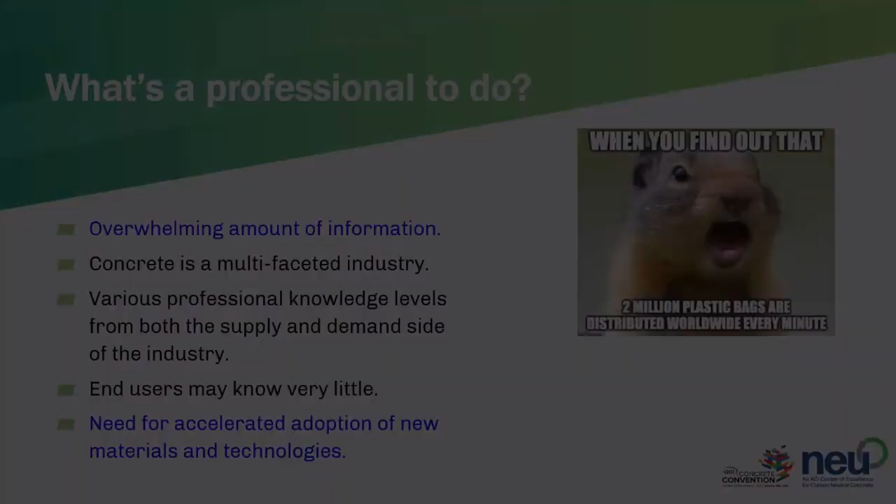So ACI saw the need and wanted to address these carbon emissions in the industry. That's why the board of directors came up with the NEU Center, an ACI Center of Excellence for Carbon Neutral Concrete, to address especially this part of the puzzle.

All right, let's quickly look at our vision: the center envisions a concrete industry where all stakeholders have access to the technologies and knowledge needed to effectively and safely produce and place carbon neutral concrete and concrete products in the built environment. If you look at each of these words, they are important—effectively and safely produce carbon neutral concrete.

So with that, the mission is to drive education, awareness, and adoption of the use of carbon neutral concrete materials and technologies. When we say adoption, we actually mean appropriate adoption of these technologies.

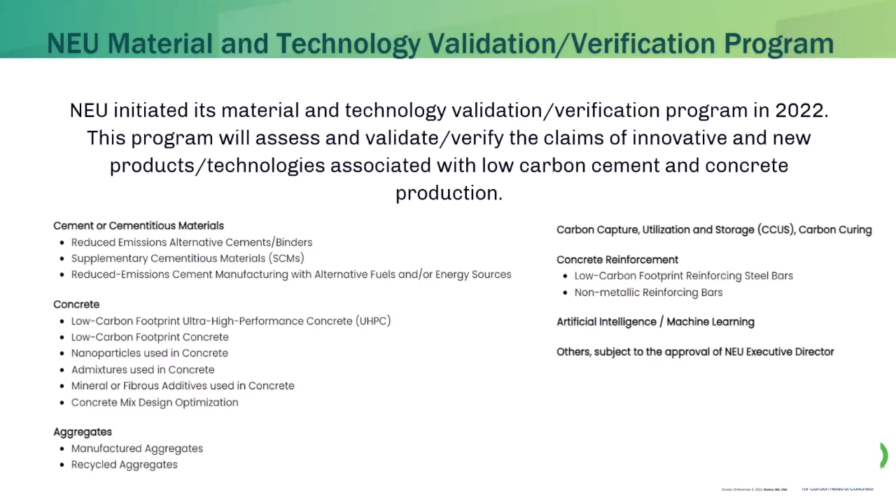Going back to my previous slide, I mentioned reliable methods. Not only should the method I use to validate or verify a claim determine if it's plausible or an insubstantial marketing claim, but also the method I use to operate my validation program must be reliable. In a sense, is it a repeatable test method, a reliable method?

Is it an international method? Can it be done in other parts of the world? To answer that question, our validation verification program will be operated under ISO 17029, published by the International Organization for Standardization, titled Conformity Assessment, General Principles and Requirements for Validation and Verification Bodies. It's published in 2019, so it's a very, very brand new document. Actually, I am also learning this document. I worked on 17065 for many years, but this is a relatively new one.

I'm not going to bore you with this figure, and I have very limited time, but I used to show this figure during my presentations when talking about conformity assessment of product certifications. If you are a testing laboratory or a certification body, you certainly know this figure. But I just want to mention that now we have a new column at the end, all the way to my right-hand side: validation verification bodies. It's new, and it's added in this figure right now.

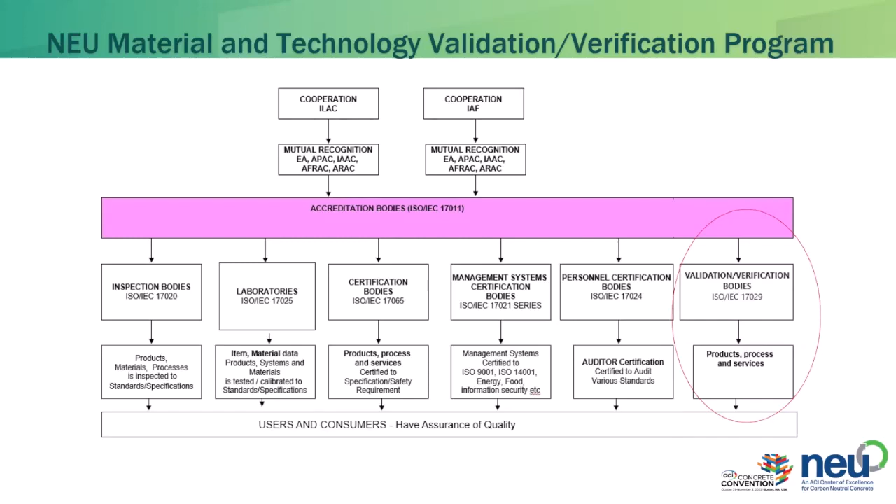So they started discussing coming up with this standard in 2016. It was published in October 2019, and they used a prior document, ISO 14065, as reference, so they are connected to each other. But ISO 14065 was only for greenhouse gas emissions. In a sense, 17029 is an umbrella document that covers all kinds of validation and verification, even including ethical statements.

So it's an umbrella document for all kinds of validation and verification statements. We'll be using ISO 17029, but if there's a greenhouse gas emission claim validation and verification, we'll be using ISO 14065 as well. Let me describe the difference between validation and verification. I got this picture from IAF, International Accreditation Forum website. I think it's a very good picture describing this. So, verification is about past activities, and validation is about future activities.

Let me give you an example, I think it will make more sense for you. Let's assume - this is not related to carbon reduction, but just for the sake of an example - let's assume I have a ready-mix concrete plant, and I invented a new water filter system which saved me 40 tons of water in the year 2022. So that's my claim: I have a new water filter system, and I saved 40 tons of water in 2022.

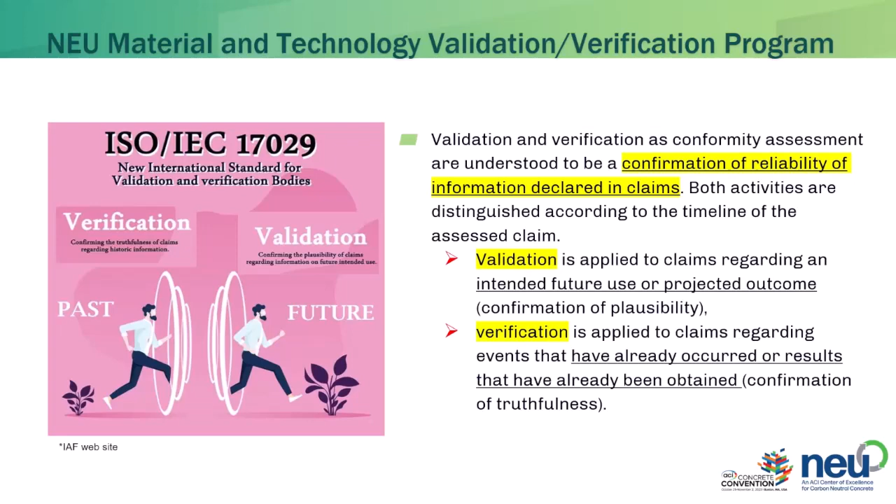And then I can validate it, but I need to ask the questions: what is this based on? How did you interpolate the data for this company? Let me get those details. But another big difference is: during verification, which happened in the past, I have all the information I need, I can provide assurance for that verification statement. But for validation, it hasn't happened - it's just an assumption. So I cannot provide an assurance in my statement if it is a validation report.

So, simplified definition: validation/verification is confirmation of a claim, and a claim is the information declared by the client through the provision of objective evidence. I put 'objective' because ISO 17029 emphasizes this word 'objective evidence' many times. You need to know where the data is coming from, who's providing the data. It has to be based on objective evidence, and the goal is to provide assurance.

Assurance in case of a verification activity, which happened in the past, or give confidence, for example, for a validation activity that will happen in the future. So I can provide those statements to interested parties, for example, a stakeholder. Remember my $5 million example? I want to invest that money. Now I have an assurance in my hand coming from NEU so that I can safely invest.

What we will not be doing is characterization of the material or system. We will not be doing examination or inspection, so we will not be coming to your factory or facility to make sure you are producing good quality material or following your quality documentation. We won't be doing certification, product certification. We won't be doing conformity assessment.

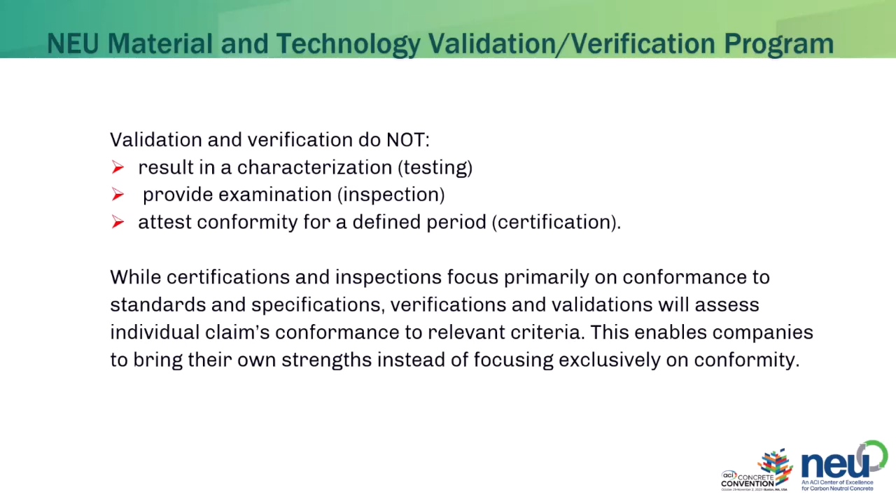So that's where verification kicks in. Your conformity assessment, your product certification through a conformity assessment may miss the best part of your product. Maybe it is being low carbon. Maybe it's having really good sound isolation. That's where you can use a validation verification program to focus exclusively on showing your own strength instead of completely focusing on conformity. And speaking of which, ISO 17029 requirements are very similar to other ISO standards.

Impartiality and confidentiality are very important. Impartiality means if I'm working with your alternative cement company, which claims to have low carbon, I cannot be working with another alternative cement company, or consulting another cement company. Confidentiality means if you trust me with your test reports, you have to know it's the final stop. It's where it stops.

We are very confidential. We have to demonstrate it through ISO 17029. Risk management is, going back to my $5 million example, if I'm going to make that investment based on a report coming from NEU, which is an ACI Center of Excellence, now I'm a part of that decision. So risk management is also very important. I need to identify all the risks that come with this activity.

You can submit your application, and then there will be a NEU team that will check your claim, and if that claim is within our scope, then we'll work with you and we'll sign a work agreement, and then we'll do an assessment.

One of the statements is, if you have a claim, and if I can use an existing standard or ASTM such as ISO to verify this claim, then we can move forward quickly. But if there's a claim with no standard, no ISO standard, for example, I was talking with somebody a couple of days ago, and they claimed carbon neutrality because they reduced the amount of labor required with the system. There may not be an ASTM or ISO to verify that claim.

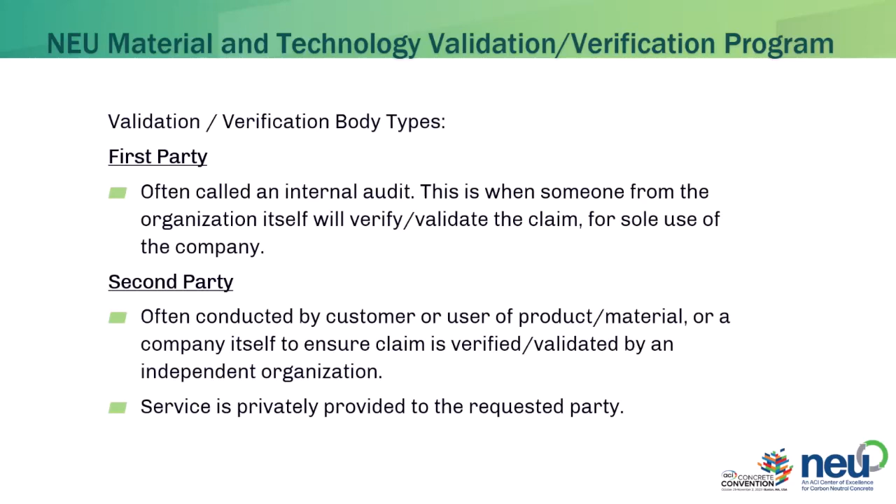Third party is similar to second party, but now NEU will make it public on our website. The report will be done for the whole public. We'll focus on second party at the moment. The report will be confidential between NEU and the client, but the client may choose to release the information at their discretion. So we'll be focusing on second party.

Again, we'll be working under internationally recognized standards. Anybody can apply. We won't be doing any laboratory work. We won't be doing physical testing or inspection at NEU. When you are submitting your objective evidence, you may be required to do some testing or submit test results.

NEU is constantly seeking subject matter experts to serve on the validation teams. You can send your information to the email below.

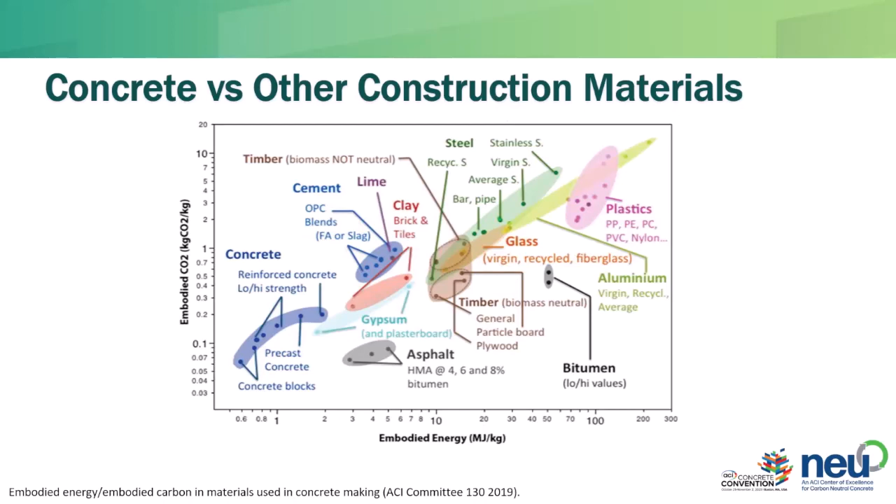So concrete, right? Compared to other building materials and construction materials, if you look at embodied carbon on the y-axis here and embodied energy on the x-axis, so how much it took to make it, concrete and cement are pretty low relative to some of these other materials. I think a lot of people are often confused by that. You see that and you say, oh, maybe it's not so bad. And of course, we all are here for concrete, right? So pro concrete, but it's kind of interesting to look at that.

So one of the questions you have to ask yourself if you're trying to look at Portland cement and reduce that carbon footprint is, where does the carbon footprint come from? Specifically in the production of Portland cement, I think probably most of us know what this kind of situation is.

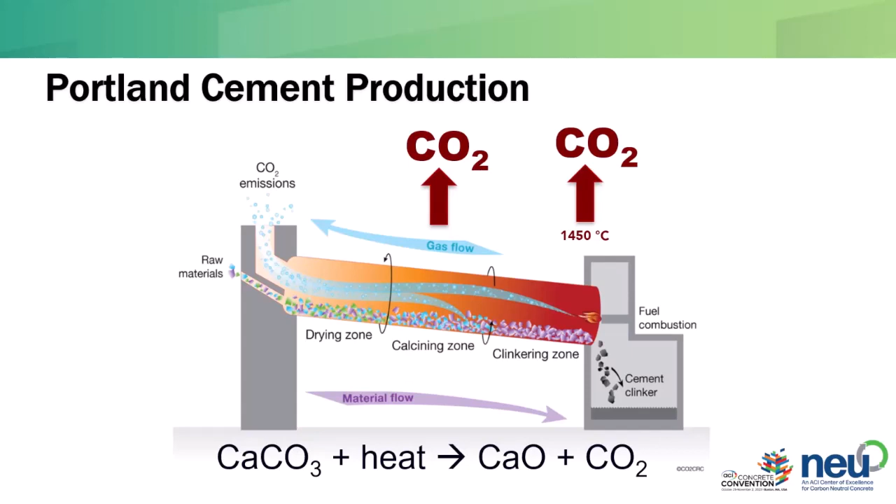Sharika mentioned earlier, there's all sorts of people on the case. We have ACI, PCA, all the letters, working on this, which is good. And if you go online, which I have been, I'm working on this document, I'll talk about it in a few minutes, there's all sorts of roadmaps. Very cool, and a lot of them are generally heading in the same direction.

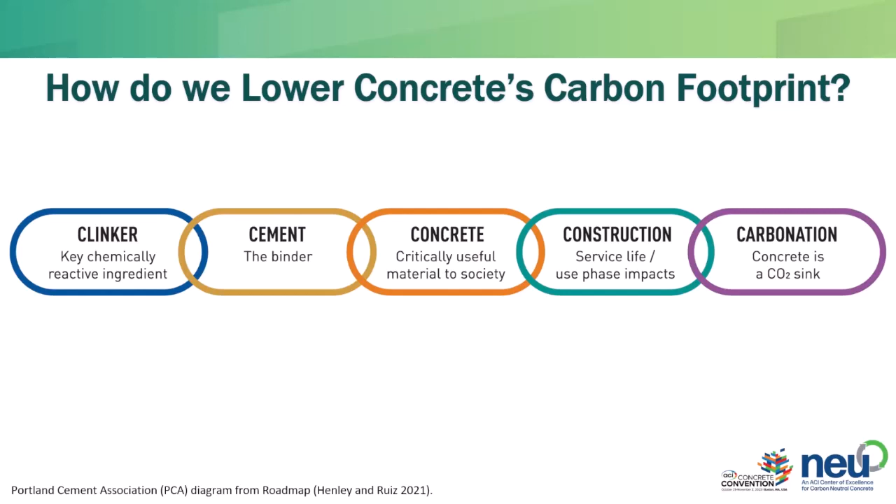So it's interesting to see what everyone is looking at moving forward. This is from the California-Nevada Cement Association. I really like how they organized it. This came out just this year. They're looking at emissions in three different categories. The first, process emissions—that's like the limestone calcination.

What can we do? Blended cements, CCUS, alternative cements, and clinkers. Then they break it apart into combustion emissions—at the plant, what can we do? We can burn different fuels to reduce that carbon footprint, and further look at waste heat recovery and renewable electricity to reduce that. So I kind of like how they organize that.

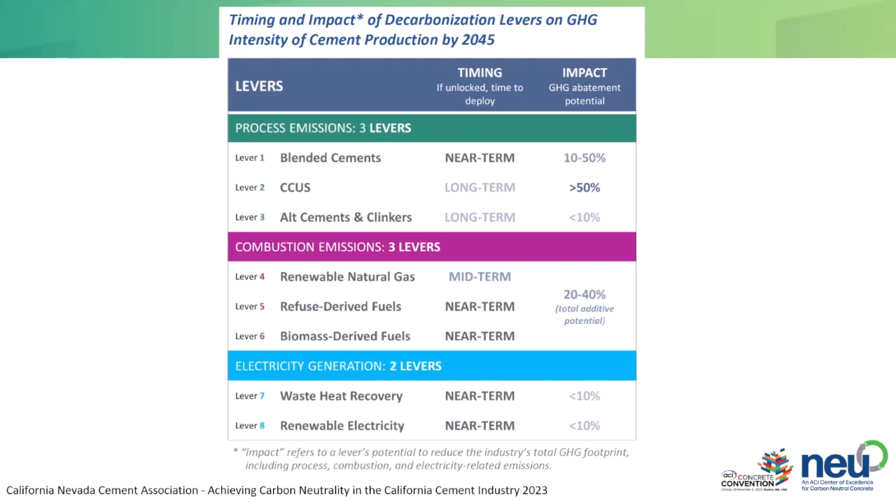All right, so anybody here that's been working on the sustainability and resiliency of concrete, it kind of always starts with sustainability and resiliency. I teach a class on sustainability, and we spend a whole hour talking about what is that, what is sustainability, what is resiliency. They're really big concepts, right? Well, we're narrowing it down.

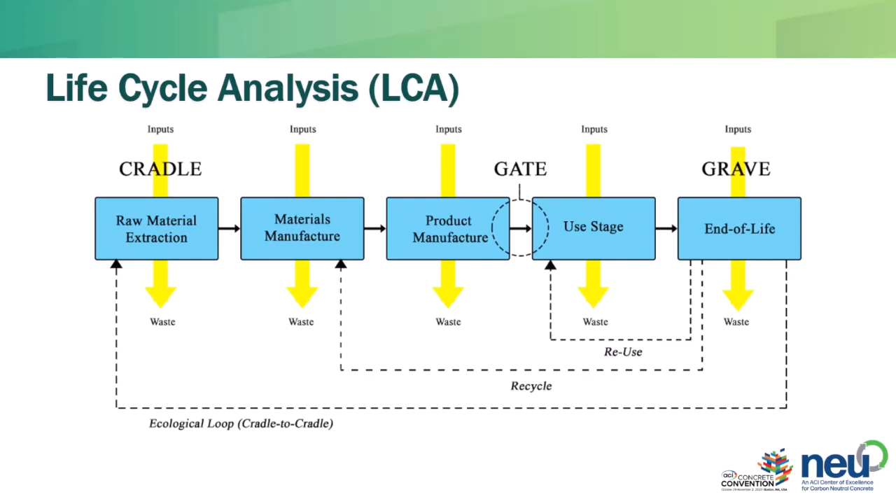And like Sharika said, we have to measure things. We have to get numbers. So we're relying on LCAs now, and we're relying on EPDs to give us numbers so we can make decisions based on data. And that's a really big deal.

All of this is leading to the low carbon concrete code. I almost started asking questions to you like I was in class—sorry, that would be weird, calling on people. Anyway, coming to this code.

So there's a lot happening right now. It's very exciting. I'm going to talk a little bit about the materials that are out there right now, what's maybe coming down the pike, and what are some of the questions we need to be asking as we start to embrace these new materials.

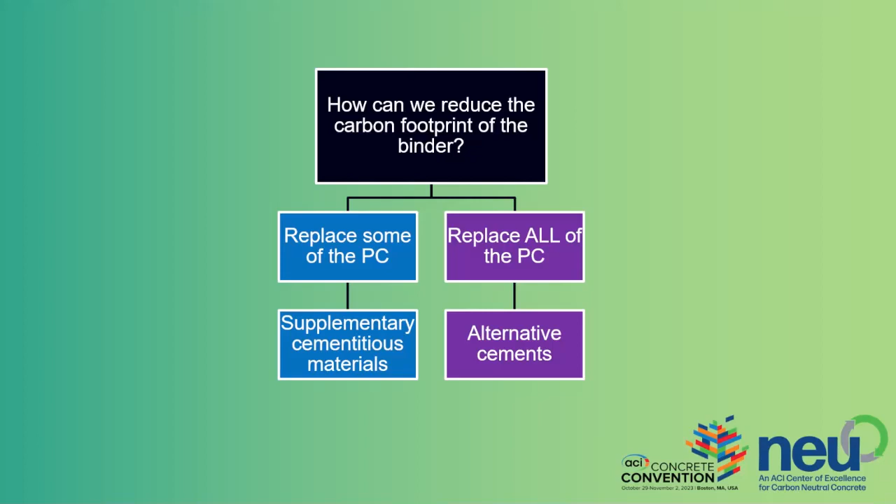So this is sort of how it used to look—how can we reduce the carbon footprint of concrete, replace some of the PC, replace all of the PC. Now we're saying, okay, we can also recapture some of the CO2 through CCUS. We're expanding it even more.

How about we make ASTM C150 Portland cement, but in a different way, right? This little chart could just keep going on and on. There's all sorts of new stuff coming out. It's pretty cool.

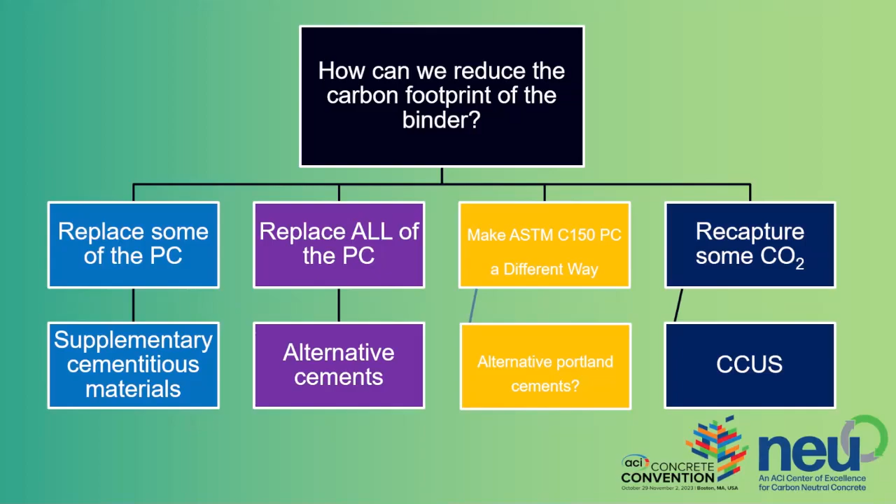So, SCMs—probably you're like, oh great, SCMs again. Everybody knows, but the thing is, they're here now. We know how to use them. They work pretty good. It's pretty direct: let's get rid of a certain amount of PC, put in something else. Lots of different SCMs. ASCMs are alternative SCMs—there's the classic traditional ones out there, and then a lot of others being developed. There's a lot of test methods being developed so we can use additional SCMs moving forward. That's a big deal.

As most of you—I have no idea what this audience is, probably some of you know—when you're looking at SCMs, they're not all the same. They're different. You have to know what they're made of chemically, what the particle size is, where it's available geographically, and they behave differently.

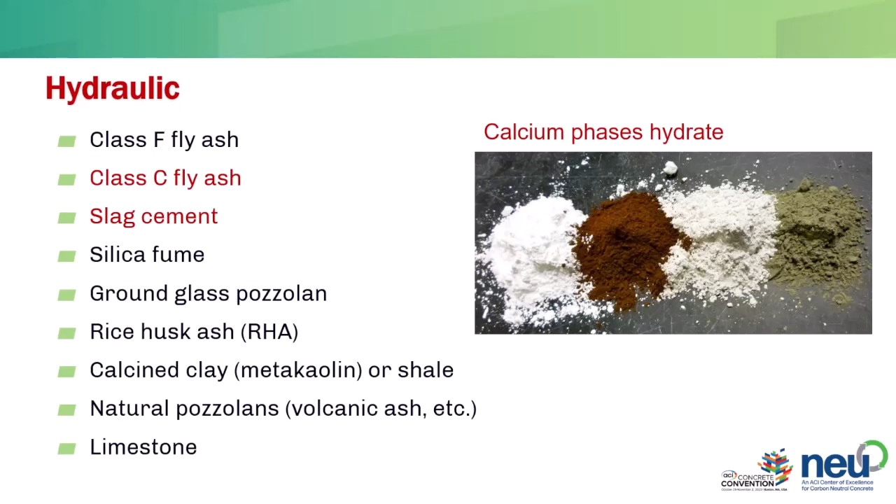So SCMs that are higher in calcium tend to be hydraulic. Class C ash and slag cement are good examples of those—if you add water to it, it gets hard on its own. You're going to have a little bit higher replacement level with those. Also pozzolanic—many of these materials are pozzolanic, rich in silica or alumina, reacting with calcium hydroxide from hydration to form more CSH.

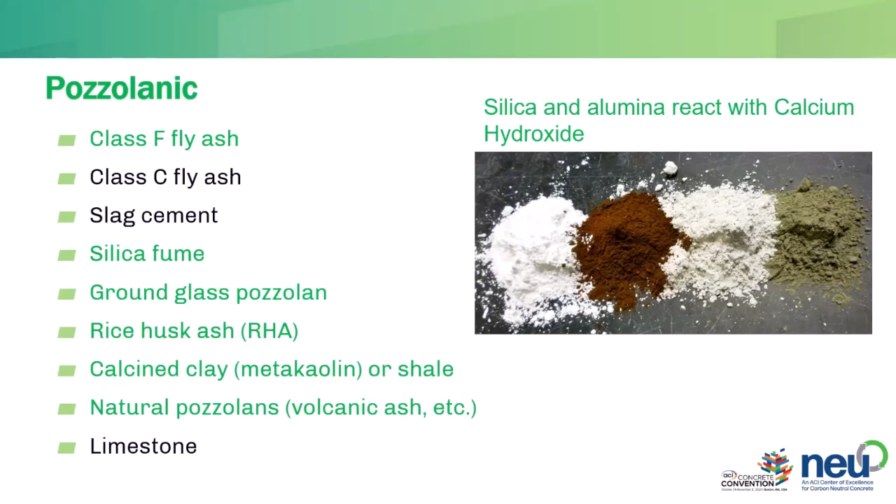And then, I don't want to argue with anyone—is this a filler? I don't know. This is what I put on my slide, but limestone is out there too, as a big one.

We hear a lot about limestone, but it used to be sort of a filler grinding aid. Right now we're saying, man, it does some things to the concrete. What is it doing? How does it work? Maybe it's nucleation sites, but it's a material that's going out there replacing some of the Portland cement.

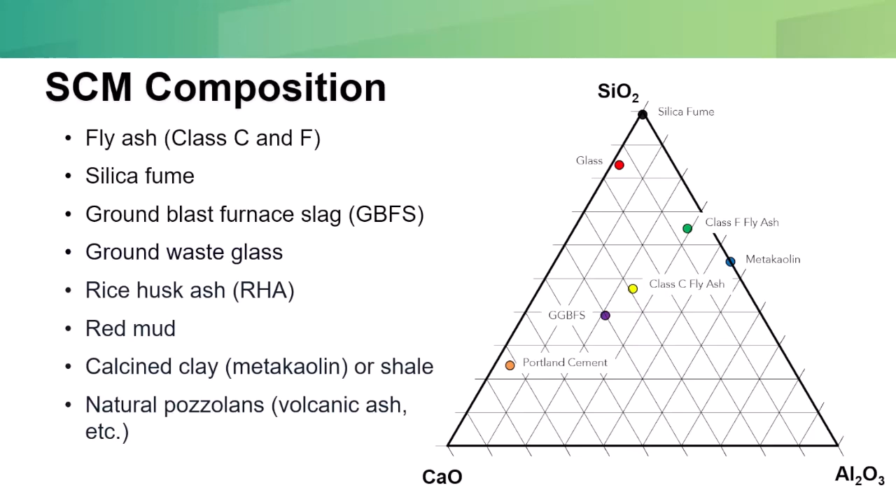When we're looking at these SCMs, the classic ones that have been around, we're looking at composition. That's really big. Calcium, alumina, silica, where does it land relative to others? Then we can kind of get an idea of how it's going to be.

So fly ash, ash that goes up into the air from coal-fired power plants, is of course the big one, most people's favorite I would say, and it's really great. This fly ash is a good example of kind of how complicated it is when you look at these alternative materials or newer low-carbon materials.

So fly ash, at first glance, you say okay, I'll replace 20% Portland cement with fly ash, great. But fly ash particles are super spherical, they have this ball-bearing effect, allowing you to maybe make your mix with a little bit less water. So now you have a more dense mix, a more impermeable mix, a more durable mix.

How do you quantify that? Maybe that mix is going to last longer than the other mix, need less maintenance. So there's more to it, I think, than just looking at direct replacement. And that's something to think about.

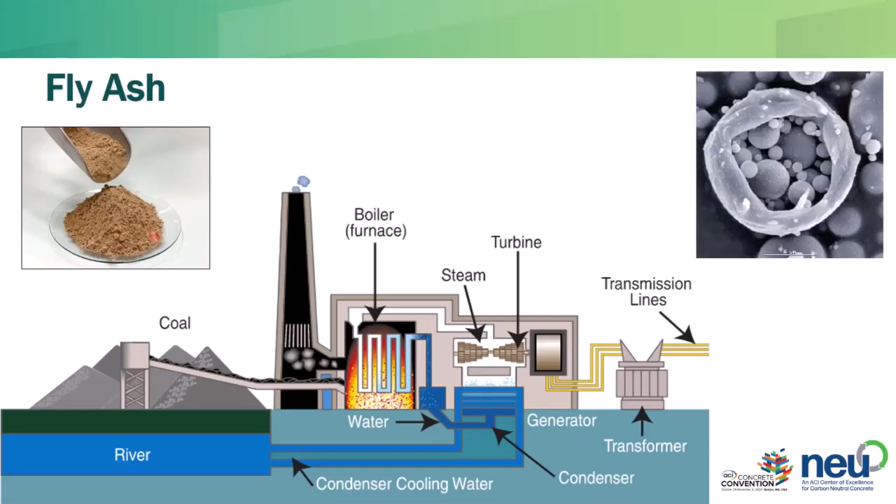I think we're all aware that fly ash availability is changing. Coal-fired power plants are being shut down, and that's good for the environment, maybe not so good for the concrete industry, but it's pushing us to look at other materials.

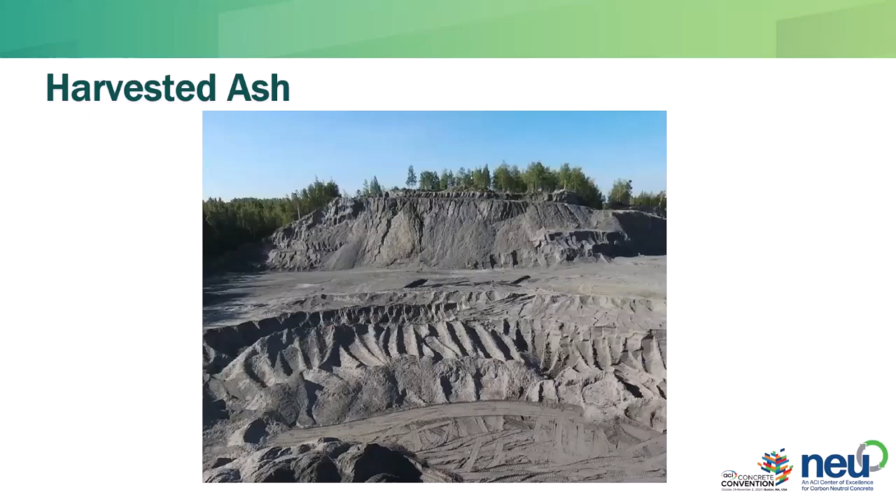There are a lot of other materials out there, also lots of harvested ash. I think we've been using fly ash in concrete since the 70s. Before that, they'd throw it away. Since the 70s they started to use it, but they were still kind of, I'll take the good stuff and throw the bad stuff away - high carbon, high alkali, whatever. And now they're like, where did we put that? Go get it. So there's a lot of harvested ash out there, and really great work being done processing it and making it successful. That's a pretty big one.

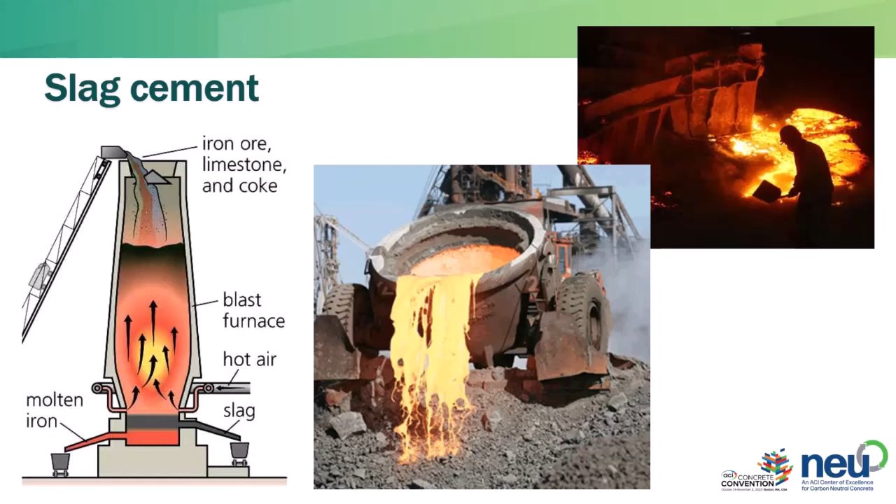Slag cement, of course, is out there. Works great, not available everywhere - it's sort of available where you're doing steel or iron work, sorry, should know iron from the Iron Range. But it's not available everywhere, so sort of where you are matters. If you're wanting to use slag but you're not near slag, transporting it is going to really cut into any kind of reduction benefit.

Silica fume is another big one, kind of similar to fly ash I'd say. Made from the ferrosilicon industry, tiny, tiny little particles, spherical - I think I've read twice as fine as cigarette smoke. Does amazing things in concrete - tiny little particles relative to massive cement particles, you get this really great packing, really dense, nice bond between aggregates and paste, etc. So you get really, really good concrete from using silica fume.

Ground glass pozzolan is sort of one of the newer classic SCMs. ASTM came out with a standard in 2020, and a lot of work has been done on glass pozzolan. One of the things about ground glass is it's available - we're all drinking beverages, eating pickles, everywhere we are, so there's glass all over the place. It's not being produced everywhere as ground glass pozzolan, but there's the potential for that to be more regional.

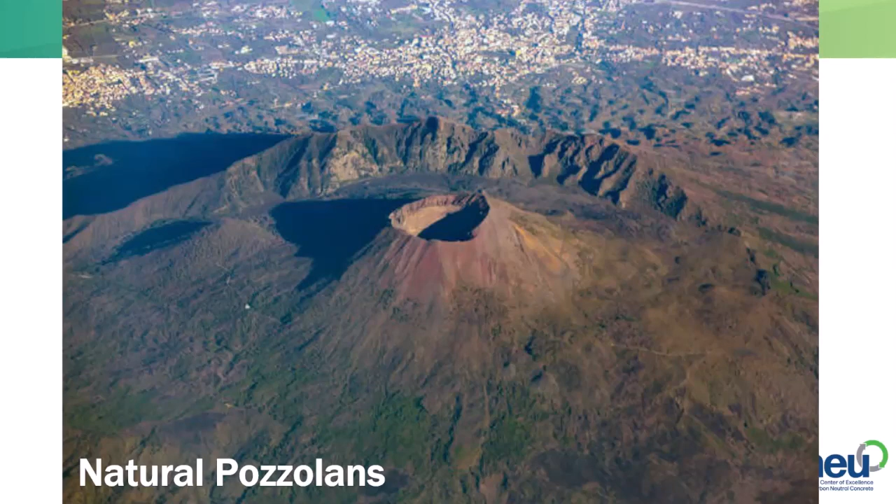Natural pozzolan - obviously not so much in the United States, but around the world folks are using all sorts of natural pozzolans: volcanic ash, pumice, scoria, mostly in the West here in the United States - materials that can be taken from the earth, maybe heated a little bit, and used as the SCMs.

And then we have some, I would say, ASCMs - alternative SCMs - so red mud from aluminum ore mining, some rice husk ash, right, all sorts of other materials that are out there that are being considered. A lot of this has to do with where you are and what's available.

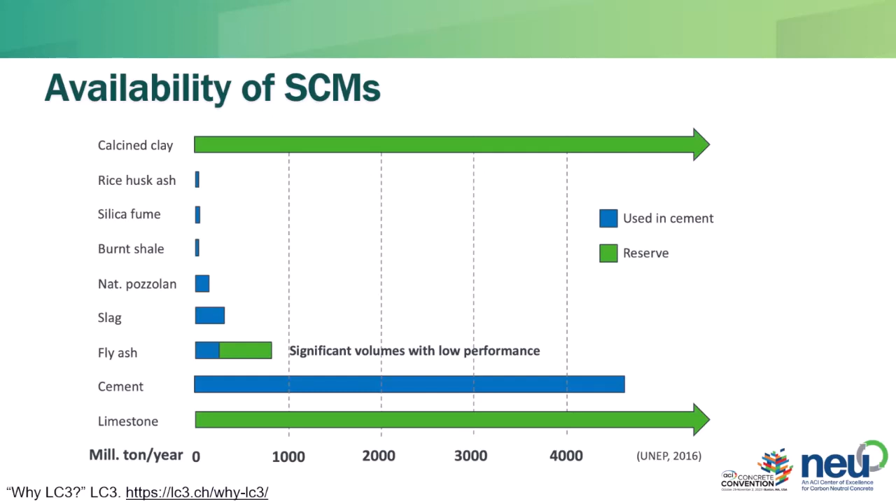So you look at these materials and say, okay, they're great, but there's not a lot of them out there. So a lot of folks, Karen included, are saying, what about calcined clay? What about limestone? These are the materials that are abundant around the whole world. So she's been working on developing LC3 cements, based on some clinker, or Portland cement essentially. You can't see my mouse, right?

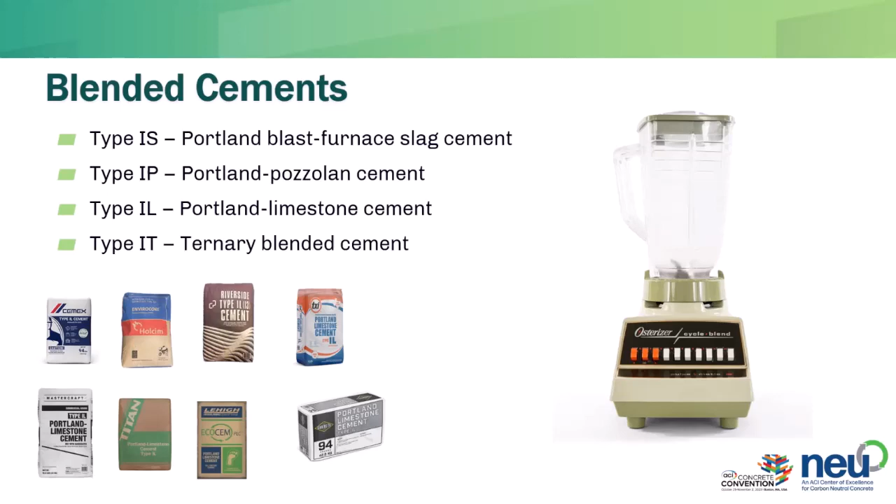Blended cements, of course, all different types—blending Portland with slag, pozzolan, limestone, or ternary blends, which are sort of DIY, your own mix. I think we all know Type IL is really here. Here are all sorts of things, right. But that reduces some of the Portland cement right off the bat. And it's been around for longer in Europe than here, so every time something new comes on board, there's always growing pains, always a learning curve.

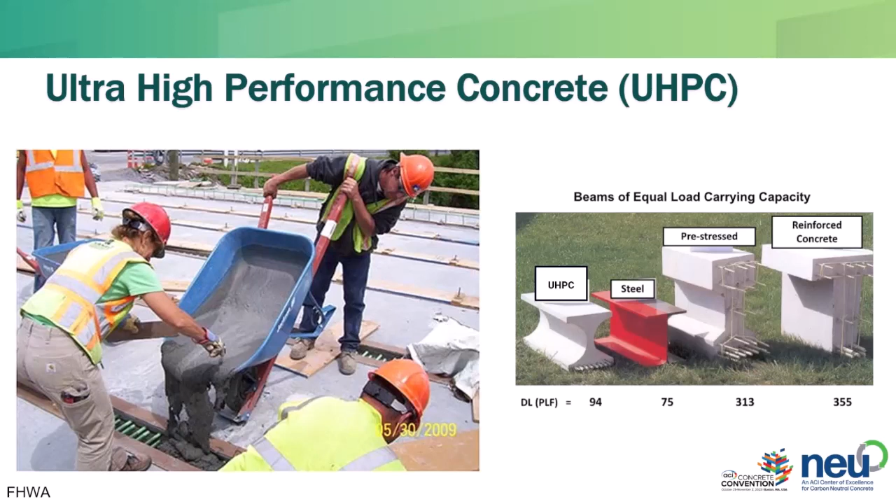So when we start looking at all these materials, there's a lot to consider. Alternative cements, like I said, we replace some of the cement, or we replace all of the cement. This is from 242, the Committee on Alternative Cements, essentially saying that an alternative cement is a complete replacement of Portland cement, except if you need a little bit of Portland cement—so it's a full replacement.

We classified them as clinkered alternative, calcined, and non-clinkered. In the ITG that was before 242, we looked at trying to classify all of these different alternative cements. There's a very wide variety of chemistries out there, which is awesome but also complicated. You can't just say, do this for Portland and do this for alternative cements—they're all different, they all need to be handled differently.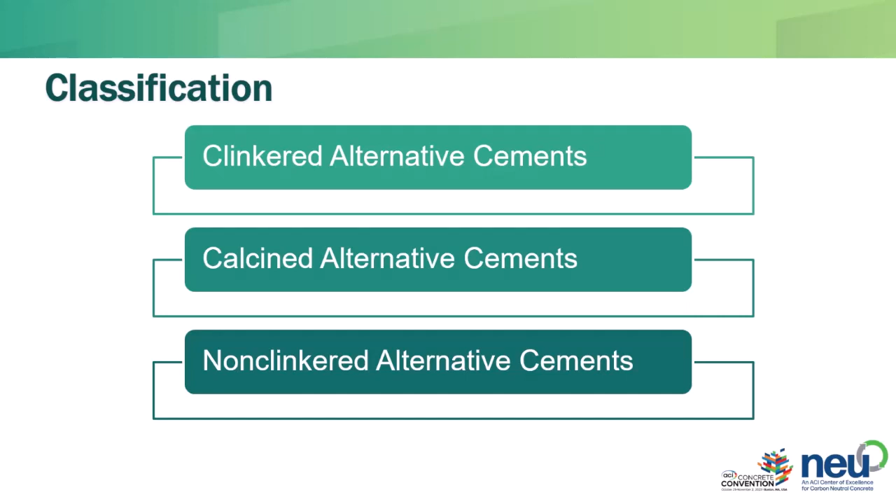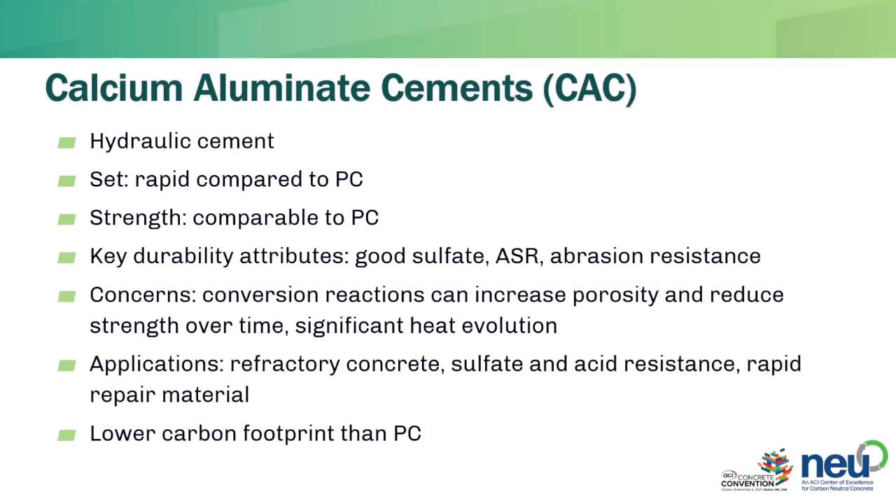Calcium aluminate cements, I won't go through this whole thing, but are hydraulic cements typically have a lower carbon footprint than Portland cement. Applications include refractory concrete, rapid repair material. So that's the other thing to consider: there's a lot of alternative cements out there, but it doesn't mean they're all direct replacements for Portland cement. Portland cement can be used in a number of applications, as you know—calcium aluminate cements, maybe not a direct replacement.

Just an example, though: there was rapid repair of an airport runway in a cold climate in Norway. They had about 15 minutes for set time and got 5,800 psi after 6 hours. So some of these cements, while they don't replace Portland directly, have really amazing properties.

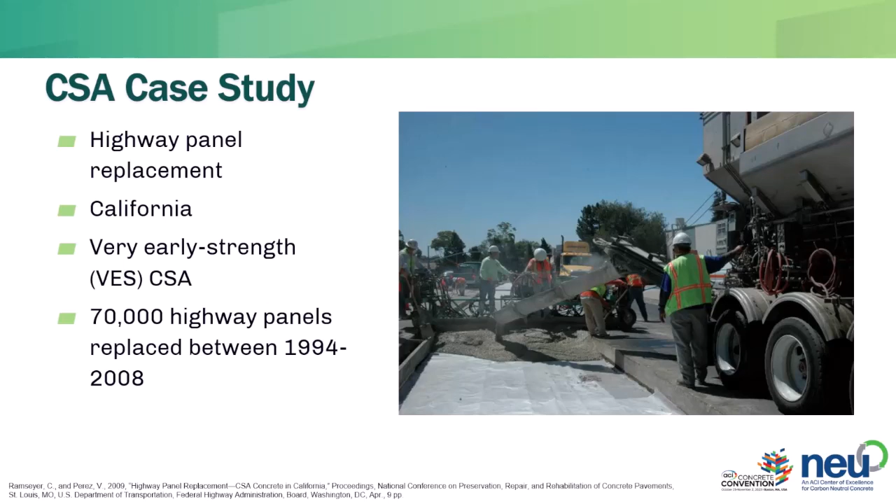I'm going to go through these—sorry. CSA, calcium sulfoaluminate cement, a big one. There's a bunch of magnesium-based cements. Alkali-activated cement's the one that we hear about frequently. This is probably the closest one that can replace Portland cement or be used in many of the same applications.

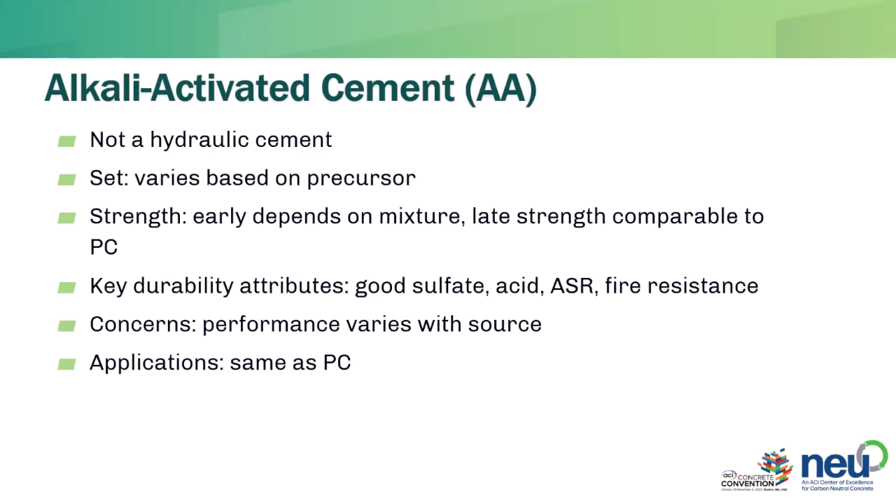Just FYI, in case you're interested in these materials, ITG 10 came out with a report on alternative cements. There's also a practitioner's guide. The report has more academic information. The practitioner's guide has case studies much more clearly presented, covering these different materials. It offers a review from the report, and then a section on what you need to consider if you're looking at an alternative cement, because there's a lot of questions that need to be asked. In addition, we just came out with an alkali-activated cements report, if you want more information on that specifically.

So, carbon capture, utilization, and storage - we saw that was a key player in many of the roadmaps that we've seen. This is just from Wikipedia here. I've talked to Sarika and several other people about trying to make sure we're all on the same page in terms of what's what. But essentially, there's a lot of companies out there right now looking at trying to pull CO2 either from a specific industry, such as the cement industry, directly from there, either storing it or using it somewhere, or capturing CO2 from the atmosphere. And the utilization goes a long way - carbon curing for mineralization, that could be with cements based on wollastonite or other calcium silicates. SCMs, some of the SCMs are ground with CO2, and some of the aggregates, the same thing. And so that is a very, very hot topic right now.

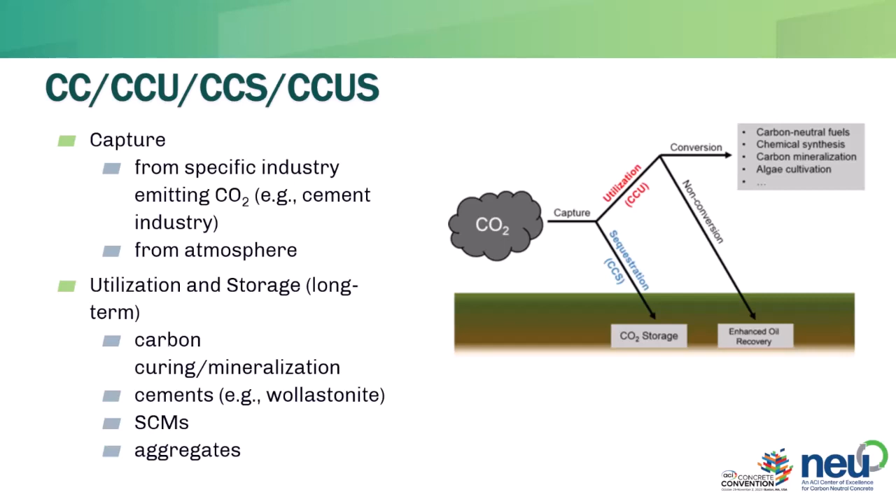I don't know if any of you guys got to the session, I think on Monday, but there's a lot of work being done out there on that.

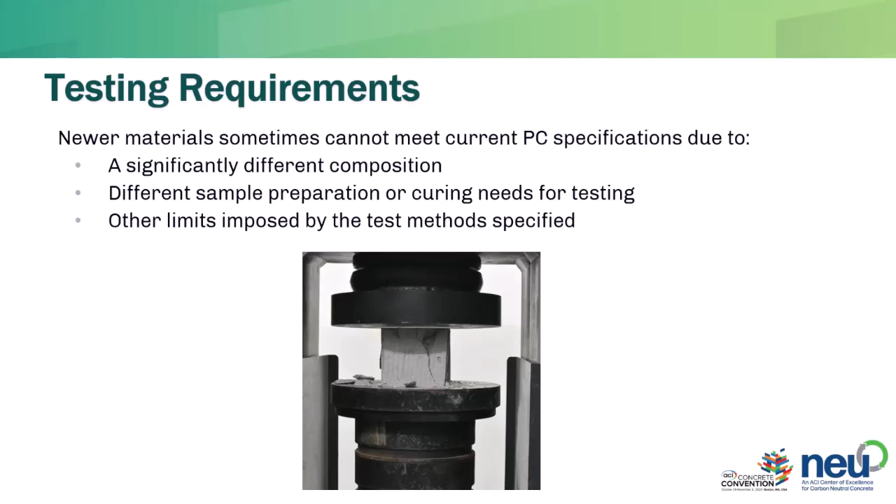So some of the challenges as we look at these new materials, of course, testing requirements. ASTMs written for Portland cement do not always apply to some of these newer materials. The example is alkali activated cements might need a little bit of heat cure, okay? ASTM's C109 doesn't allow for that. Otherwise it works. And I think ASTM just fixed that, but there's lots of questions out there.

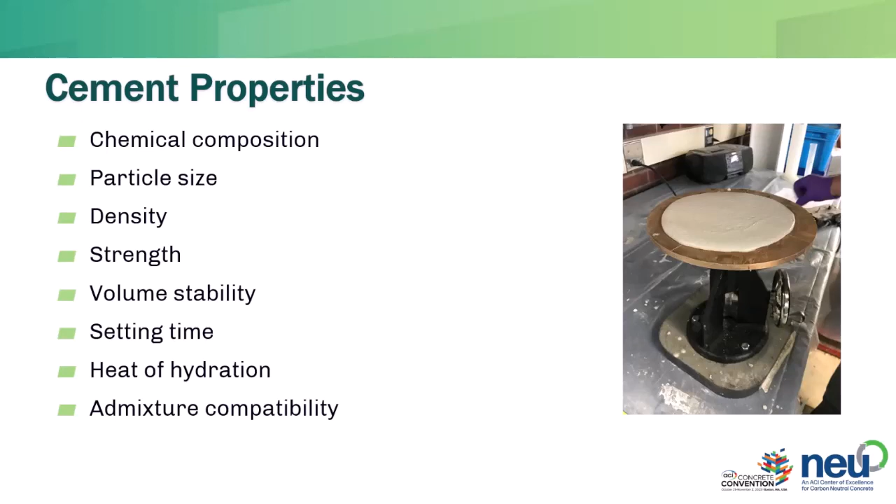And so it's lots of things to consider. Long-term testing data is one of the things that a lot of people are looking for. I think when you're looking at any kind of construction having to do with life safety, of course you're saying, where's the data, where's the proof that this is lasting a long time? All sorts of cement properties need to be understood with these new materials - there's a list here - concrete properties as well. Lots of questions to ask. But I think that the companies that are out there are learning a lot from things like ACI and starting to answer all these questions.

So one of the things I've been working on, I've been doing a little bit of consulting with the NEU, and one of the things I've been working on is a low carbon concrete materials company survey. So trying to reach out to all the companies out there. And if you're a company and I haven't reached out to you, please reach out to me - be happy to have you be part of it. But we're trying to say, what's going on out there? What are the companies doing? And so these are some of the questions that we're sort of asking.

So what's the technical readiness level? Are you starting up? Are you in lab doing stuff? Are you actually producing? When are you going to be available? Where are you available? What are you making - an alternative cement, a reinforcement, what other materials? What's your potential application? What's your global warming potential? Have you done an EPD? And then what's the cost, roughly?

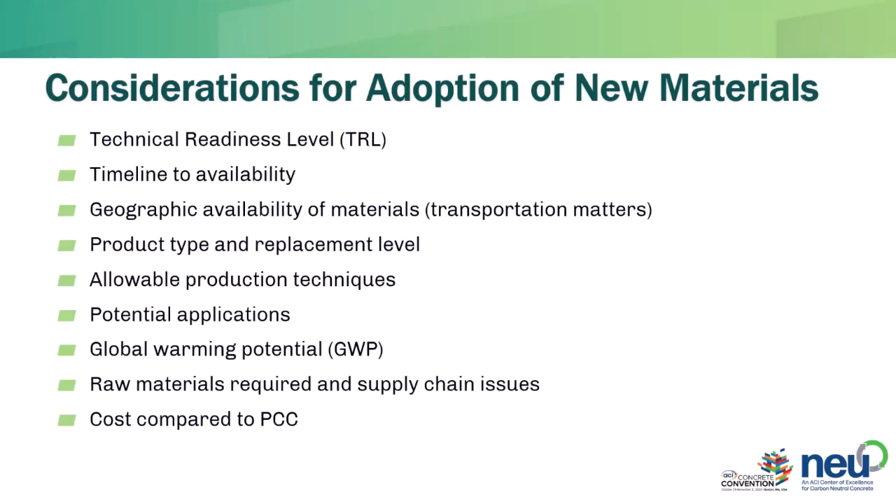And it's been really interesting to see what's coming back, and there's a lot of really awesome technology out there. So we're working on that survey. There's two parts - Part A is pretty quick, and then Part B is a little bit more in depth, just to kind of get a better idea of what you're up to.

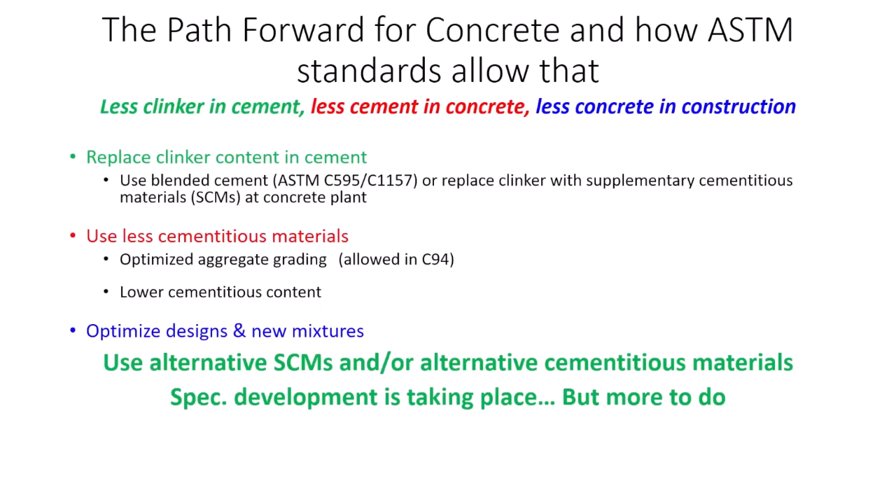As Mary talked about, there are new alternative SCMs on the market coming out or being developed, and alternative cementitious materials. There's specification development taking place, but there's a lot more to do. We're getting a lot more new development companies - at the last ASTM meeting in June in Denver, we had at least 6 startup companies show up asking how can we get into the ASTM process. Some of them are producing alternative cement, some supplementary cementitious materials, some maybe both. So we're working on a strategy at ASTM to see how we can help get these people started in the ASTM process of getting specifications and move forward.

But first, what is a spec? A specification is part of a contract - it's a legal document, a purchaser agreement between the supplier and the purchaser of that product. For materials, the basis is a purchase agreement, and for construction, typically specifications are part of a contract document for allowed construction. They're not textbooks or research reports - they're a contract document for purchase. And you can't limit a property unless it can be measured.

So we talk about performance and prescription. One of the things we're doing is trying to move towards more performance-based specifications for materials. Traditionally, a lot of specifications have been prescriptive - it has to be these materials and these proportions, as opposed to asking what you're trying to get out of the product, what your performance parameters are. Often they're a mix. If you look at ASTM C150, there's setting time requirements, strength requirements, but also compositional limits. It implies that all materials that meet those minimum limits in the standard are the same when they're prescriptive.

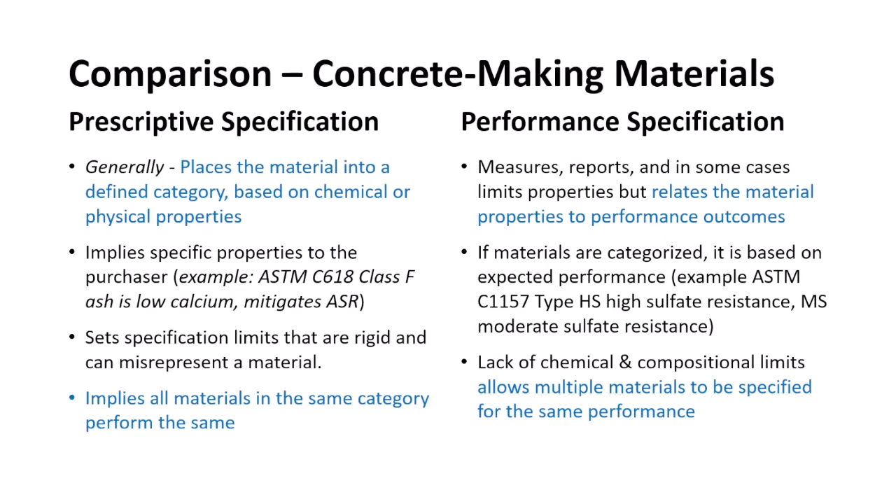So if we don't put the compositional limits in and just specify performance, we can open up the doors a bit. We have a performance specification for hydraulic cements, C1157. It's been there since 1992. I think less than 5 states have adopted it in the last 30 years, because for some reason people like to talk about performance, but they don't trust performance. Or they want to be the cooks in the kitchen, to tell you how to make it as well.

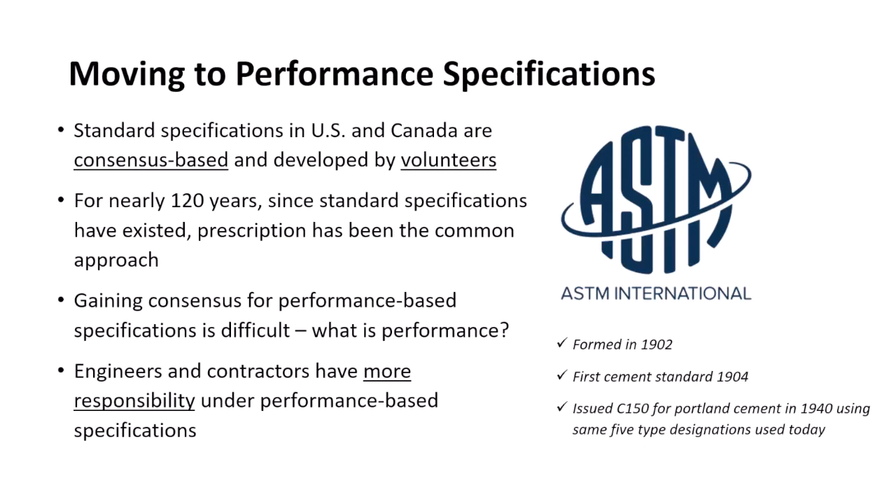As we move forward, just remember that if people think standards development is slow, it's a consensus-based process. It's not the same as many other parts of the world where you don't have consensus processes. You've got many people coming from different viewpoints, and they all have to come together to agree on something. And it changes roles and responsibility and performance towards the engineering team - they have to know what performance they're looking for, and often people haven't thought that through in detail.

So we can meet a lot of the 2030 goals for reduction in global warming potential by just doing things that are allowed now in the standard, without making any changes whatsoever. We have Portland limestone cements with up to 15% interground limestone that offer about a 10% reduction in CO2 just by utilizing them.

They were intended to be equal performance to the base clinker for the type 1-2 cement they were replacing. They're not to be equal performance to every other cement - they were supposed to be equal in performance to the cement from the same clinker from the same factory. So if you're going to buy cement, some of the issues that have been involved with Portland limestone cement, which seems to be unique to certain parts of this country and not other countries, is that people are buying from multiple sources. There may be issues, but like in Canada, we've been using Portland limestone cements - we're at 100% now. There was never any issue with adopting them and using them. The contractors did their base homework, and everybody communicated and got that done.

Anyway, so 10% reduction from that. You can increase the level of SCMs. Fly ashes and slags have been used for years, but typically at lower replacement levels. A lot of DOTs limit the maximum SCM level to amounts that don't allow you to optimize and reduce further, but you're getting a direct reduction in proportion to what you're replacing of the clinker.

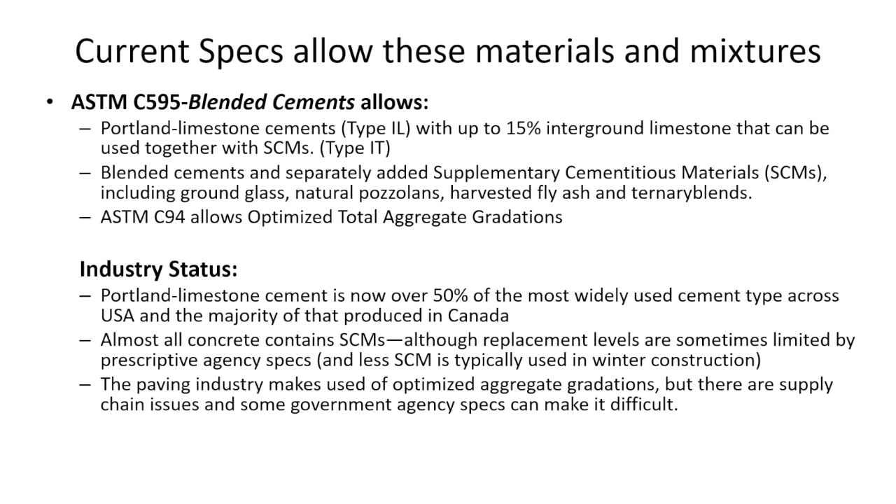All concrete contains SCMs pretty much, but some of them are restricted by prescriptive agency specifications, which are often legacy type specifications. And not many people do the aggregate optimization, so it's fairly easy. This is just a cartoon from the Cement Association of Canada report - just using a limestone cement with either a moderate amount of fly ash or slag, you can get down into the 50% reduction range.

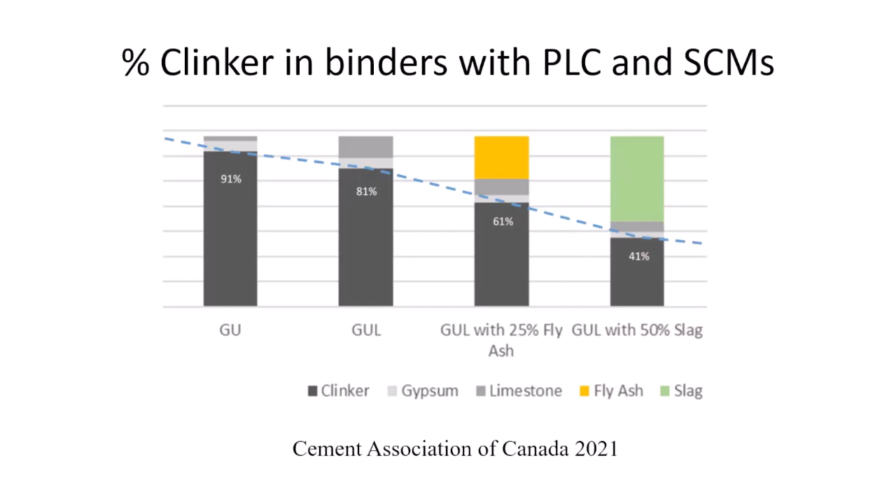Now, Mary mentioned this earlier - what's the availability of materials? This is something that Karen Scrivener at EPFL has been pushing, that on a global scale, when we're trying to make an impact, fly ash and slag are relatively small in availability in proportion to the Portland cement that's being produced. A lot of that Portland cement, about 50%, is from China.

And China seems to have peaked now, but India is growing - they're probably going to double their cement production in the next decade. And Africa is rapidly developing as well. So what's available for these people if we're not going to have more coal-burning power plants, and the blast furnaces are being converted into electric arc furnaces, so the amount of that blast furnace slag will reduce in availability over time.

A calcined clay is already allowed. It's already been used in concrete in North America, but typically the high purity metakaolins. Now there are companies making lower grade versions. I think Ash Grove has a plant now in Nebraska, and I understand that Holcim is doing that in Utah now, calcining clays. And then they can blend that with the limestone cement and make an IT cement that is allowed now under the standards, C595.

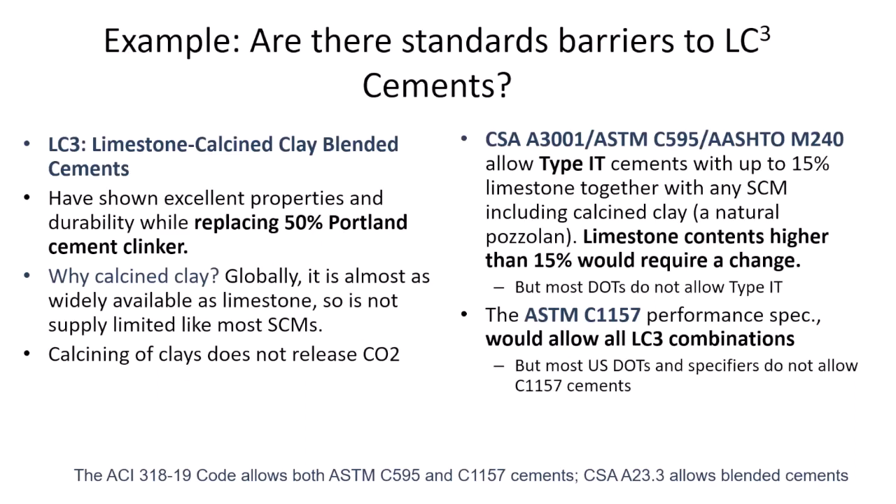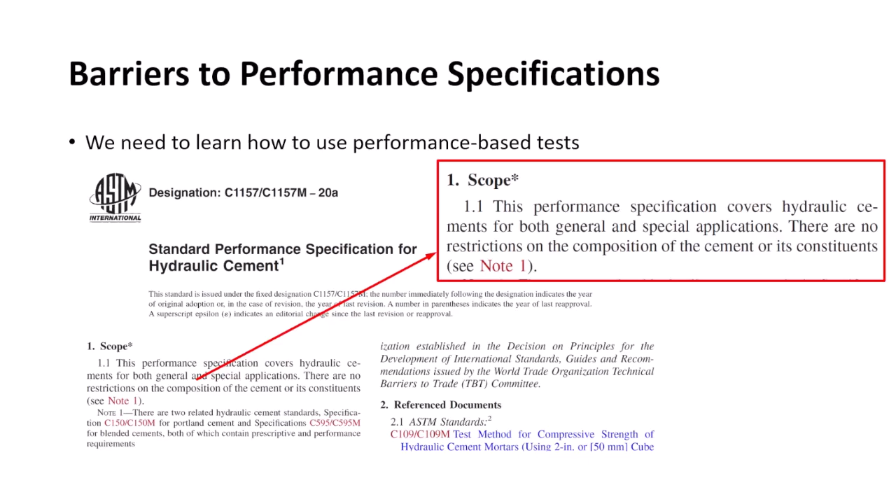So we need to learn how to use performance specifications - either trust performance or we don't. This is the 1157 scope: the performance spec covers hydraulic cements for both general and special applications. There's no restrictions on composition of the cement or its constituents - you just define what performance you're looking for: setting time, strength, volume stability, those things. And you'd think people would use this, but they don't.

As I said, only very few people have adopted it. People want performance, but for some reason they also want to know what's in it.

A lot of the stuff on prescriptive specs is because of legacy specifications that have been developed over 100 years, before the use of SCMs, just based on Portland cement, water, and aggregates. They have not considered the fact that concrete technologies moved on with SCMs and chemical admixtures of various types that can drive performance.

We're developing new tests, but some of the things people don't understand or don't want to take on.

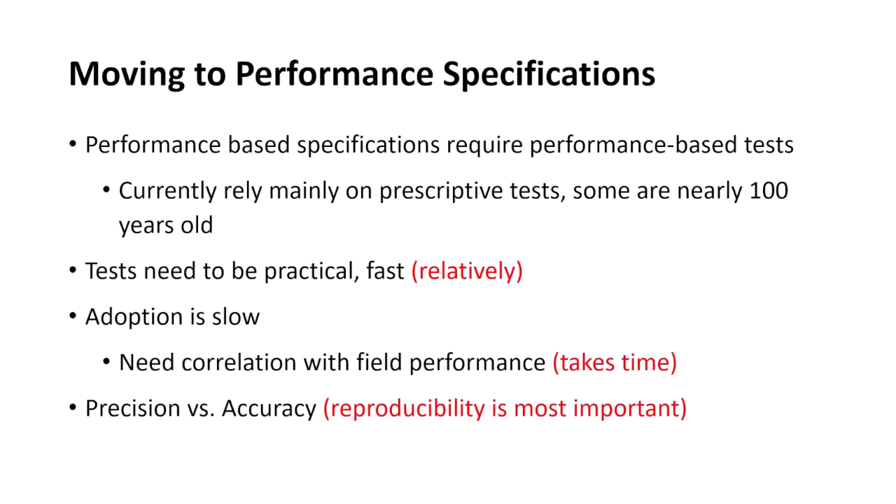Performance specifications require performance tests. Many rely on prescriptive tests. Some are pretty old. Tests need to be practical to be in a spec because you want to do them in a reasonable time frame. And we need to correlate with field performance, as Mary mentioned, and it takes time.

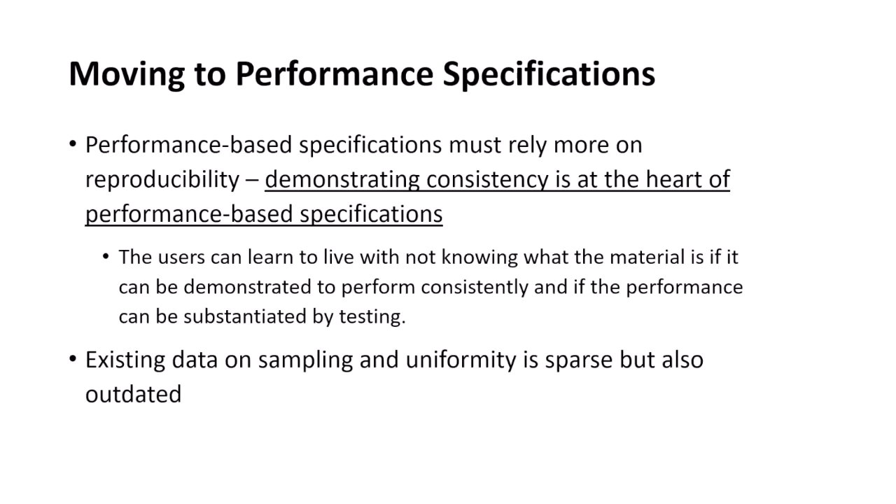I'm playing up to the ASTM part of this story, why it takes some time to do this. And we've got to have consistent product. You can use any product in concrete as long as it doesn't change every day. It's got to be consistent. And so we need some data on consistency.

So we've had some recent successes, though, and Mary mentioned harvested fly ash. I was involved with getting the standard changed in North America, Canada and the U.S., on allowing harvested coal ash, because the number of coal plants has significantly reduced, but there's almost 2 billion tons of coal ash in landfills around the United States at over 500 sites. Some of it's pure fly ash, some of it's intermingled with bottom ash, but it can all be processed. It's exactly the same material.

Mary mentioned that some of it was waste, wasn't used because it was not quality. That's not the case in 90% of the cases. There was just no market for it at the time it was put in the landfill. They were producing more ash than there was a market for.

So a lot of the stuff in the landfill is actually better quality than a lot of the existing plants are producing now, because of the environmental controls that have been put on coal-fired power plants over the last 20 years - low NOx burners, low SOx requirements, and mercury scrubbing. So a lot of the ash in the landfills is better quality to start with.

You just have to get it out of the ground and process it to reduce the moisture and de-agglomerate it. And companies have been doing that, and now the specs allow it. Since June of last year, that's been allowed.

One of the issues with new materials coming on the market, alternative SCMs or different SCMs, is what are the reactivity? How do you tell? A lot of the specs we have, like 618 for fly ash and natural pozzolans, uses a strength activity test that, although it's okay with fly ash because we have a history of using fly ash, we sort of know what it does - I can take ground sand and make it pass the strength activity test in 618.

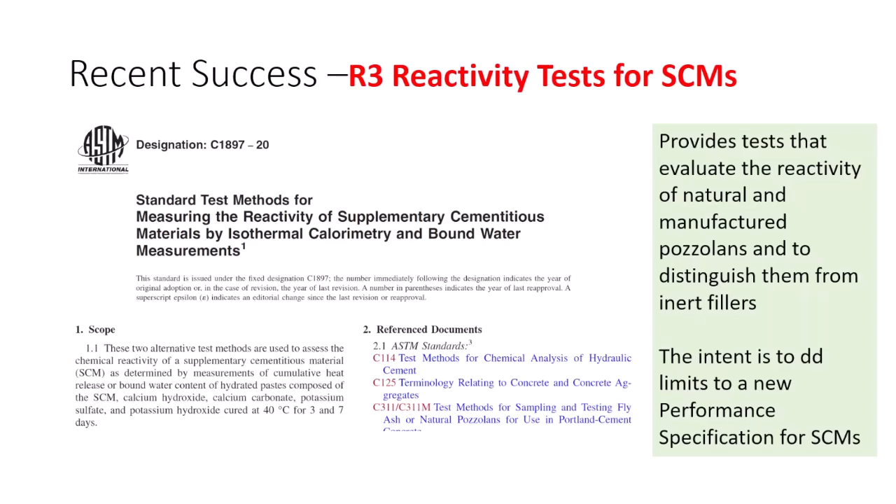That's not a very ringing endorsement for the reactivity, so we developed a reactivity test as part of a RILEM committee I was involved with, and I championed this through the ASTM system to get this reactivity test, the so-called R3 test, using isothermal calorimetry as one method and just bound water measurements as another, to evaluate whether pozzolans are actually reacting. And we have a standard for it, which we're hoping to incorporate in a performance spec for SCMs.

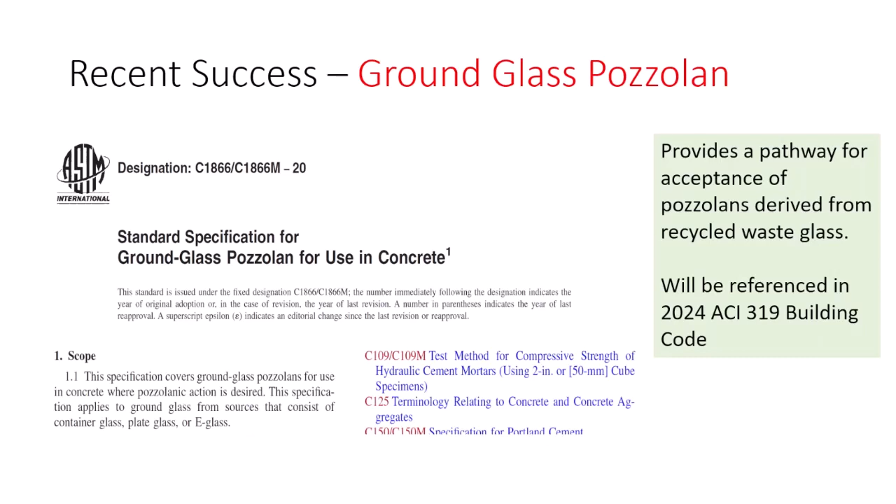We got the ground glass pozzolan standard in 2020, which allows municipal waste glass recycling operations to process and grind the glass and make it into a pozzolan. There's about 3 or 4 plants in the U.S. operating now, but the total capacity is still under 1 million tons, so it's not a huge quantity. And there are some issues with using it in terms of its high alkali content, in terms of ASR issues.

One of the things we need is better performance tests, and something that has been developed with a number of people - Larry Sutter got this through the system - was a foam index test. It's not a new test, but it was originally applied to evaluate loss on ignition in fly ashes. I chair a committee on performance of cementitious systems with chemical admixtures, looking at the whole binder, and this test can be used to evaluate whether you're going to have air entraining issues with a combination of your chemical admixtures and cementitious materials.

And it's a quick and dirty test. You can find out whether you potentially have issues and how much extra air entrainer you might have to add to get the air content you're looking for, without waiting to put it in a truck and discover you don't have the air content.

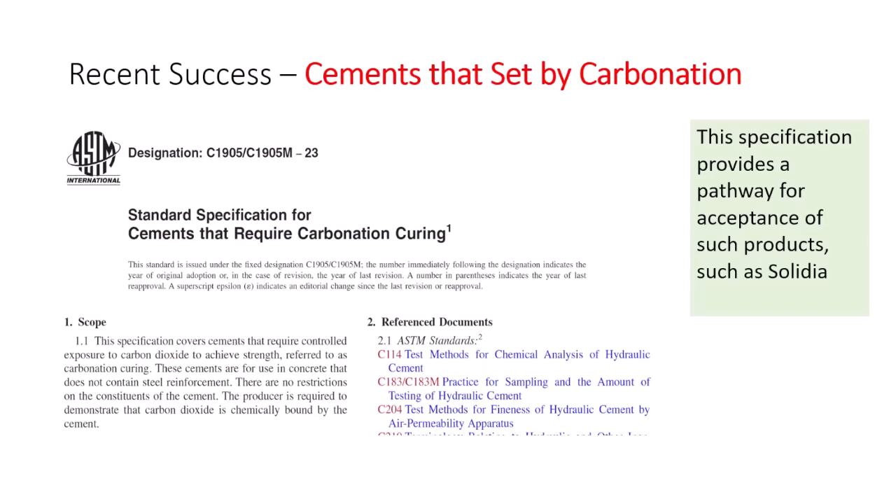So it's this predictive test. There's a brand new standard that just came out in the last couple of months for cements that set by carbonation, to allow some materials that don't hydrate but instead sequester carbon. There are companies, such as Solidia, that use a wollastonite type of calcium silicate that binds with CO2 - it doesn't harden on its own, it hardens with the presence of CO2. There's also CarbiCrete up in Montreal, making masonry units with waste steel slag, carbonating it to get it to harden.

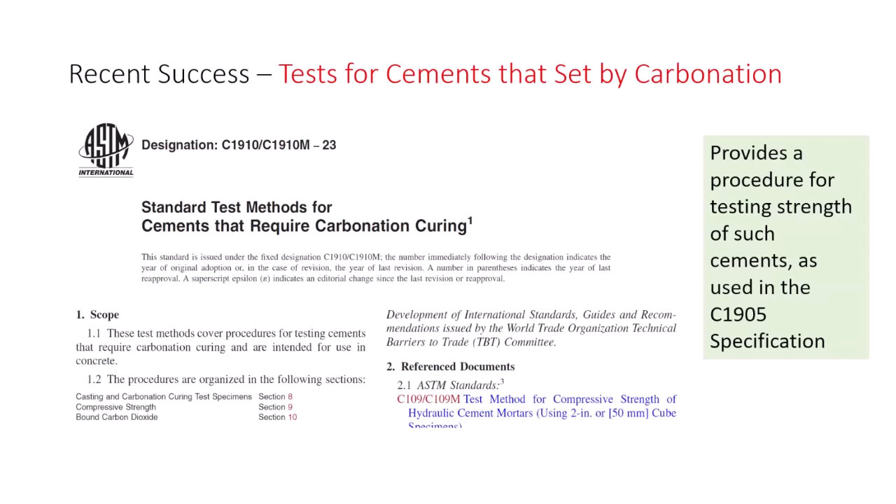It meets all the specs. There's a test method that's been developed to go with that spec, to evaluate how you measure the strength, whether it's going to get hard or not, and how strong it's going to get. So it's tied into that specification. That's all happened in the last couple of months.

There's also a test that just came out this year on strength of alkali-activated cementitious systems. Again, for the cement side, using the same 2-inch cubes people use for other acceptance tests, but it's been modified to allow testing of these alkali-activated systems.

There's a lot of things that still need to be done. We were just talking about colloidal silica today in the hallway.

We're working to modify an existing standard, C1697, for blended SCMs, so you could take a fly ash and a slag, or a different pozzolan - two different materials - put them together and meet it. Right now it says each individual material in your blend has to meet the standard on its own. So if you had a fly ash that didn't meet one requirement, say fineness or loss on ignition, you couldn't use it in that blend. We're trying to change that, to open it up so the final product meets the spec, not the individual ingredients. That will open it up to more accessible use of a number of materials.

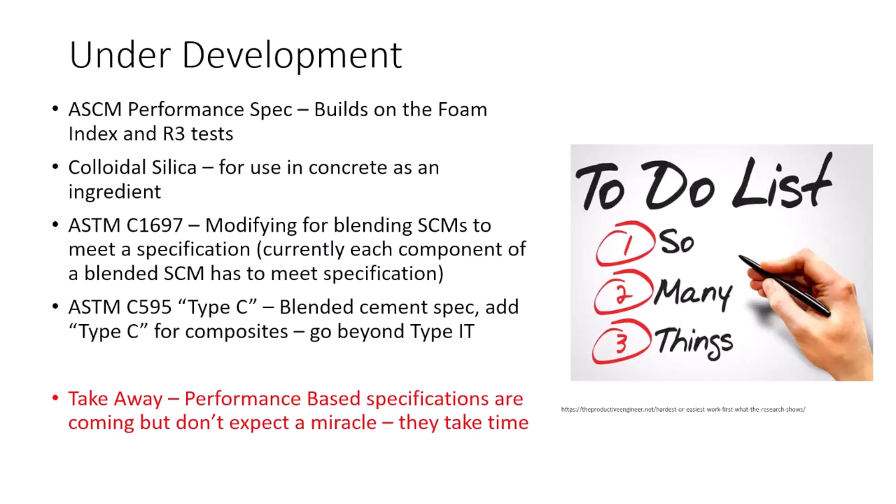We're trying to look at composite cements under 595. We're also looking at a performance spec for supplementary cementitious materials. Again, trying to use this reactivity test we talked about, the foam index test, as a performance evaluation of these new materials, as opposed to saying what's in it compositionally.

That's the one I mentioned before, where each raw material in that spec has to be ASTM compliant on its own, and that causes restrictions on evaluating materials that could be used. That would also be an issue if you're trying to make a blended limestone clay system, like an LC3, to replace 50% of your clinker with a blend of limestone and clay. Right now, that's not allowed under this spec because limestone isn't defined as a supplementary cementitious material. And that is an impediment.

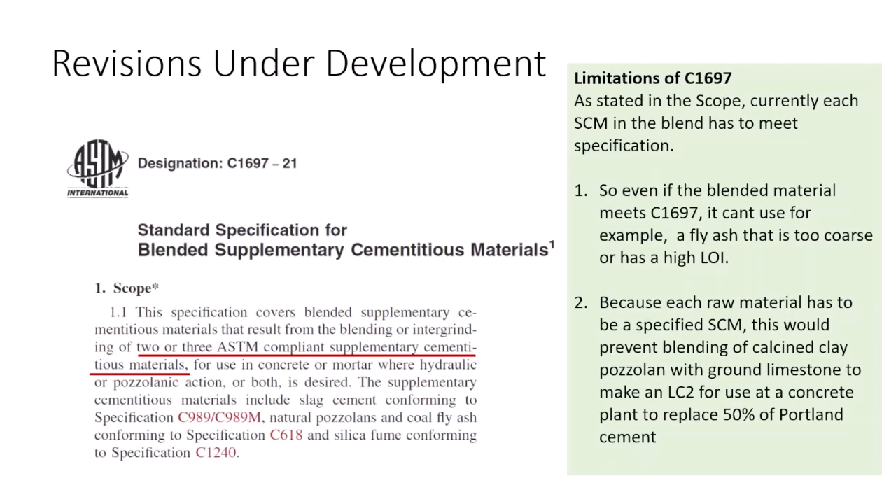We want to fix that, because blended cements have been big in Europe and other parts of the world as single products. That's not been the history here in North America, with ready-mix plants adding SCMs separately at the ready-mix plant or at the precast plant. Having an LC2 spec would allow them to do the same thing as LC3, but added separately at the ready-mix plant. So we need to make a change that would allow that to happen. We're looking at that as well.

As I mentioned, there are many new startup companies with new materials coming in. They're coming to the meetings because they realize they need to fit into specifications to be used, especially for building code applications, which have to recognize materials by standards that are specifications. They may have to look at modifying existing test methods, because a lot of the test methods we have were designed for Portland cement concretes.

One of the things I want to mention is these new materials have to fit into the existing infrastructure. The concrete industry has ready-mix plants, precast plants. You've got to be able to transport the material into a plant, put it through a mixing plant, into transportation units such as ready-mix trucks, and place it at a job site. So that infrastructure exists, and nobody's going to build a new infrastructure for a material that doesn't fit that bill. It has to fit into that existing infrastructure for all that part of the system.

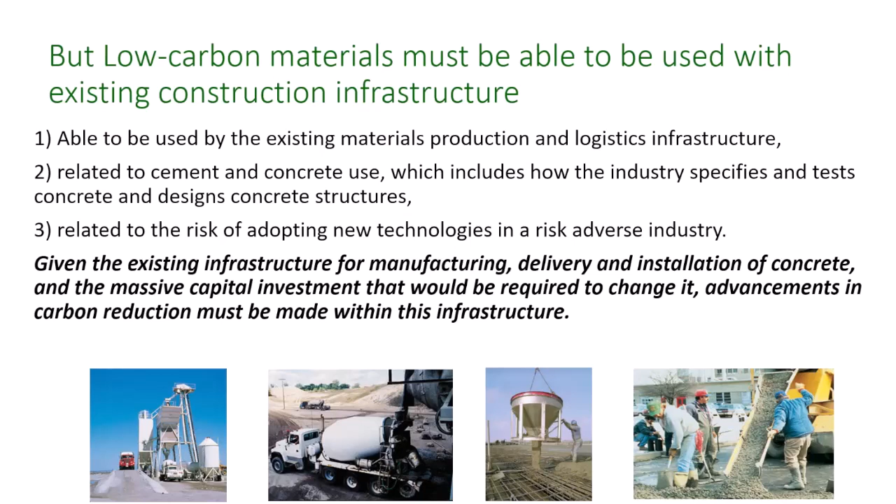Some of the materials, one of them couldn't get out of the tote bags into the ready mix. One started to set up in the ready mix. Another started to set up as they were trying to place it, so they had to rip it up, because these people had never tested it in practice in the field. They'd only ever done it in the lab or in small scale, so they hadn't taken it through the system, scaled it up to the applications and things that happen in the field. So we want to accommodate people, but the people developing these products have to realize they have to fit into the existing infrastructure to be used.

So we're trying to evolve the standards as fast as we can, and we're trying to respond to needs of the community as they change. But there's always resistance to change. We never see resistance to change here, do we?

And it doesn't matter. If you have a new product and something goes wrong, everything gets blamed on the new product. I've seen it four or five times with changes in materials over my career. You always blame the new material for anything that ever went wrong. It doesn't matter what the reason is. The new material gets blamed because it's easy to point to.

We need to make changes. There are only a few of us working in this space. I'm a recovering academic, as is Larry, but very few academics show up at ASTM on our cement and concrete committees because they find it boring. It's not exciting, it's not research in the lab doing students. It's taking the process through to something that can be used commercially. They usually lose interest after a couple of meetings because it seems pedantic and boring. But it's a basis of trade and contract agreements, so that's important if you want to see your product used.

So thanks for that. We're working like beavers as fast as we can, and we welcome your participation in that process. Thank you.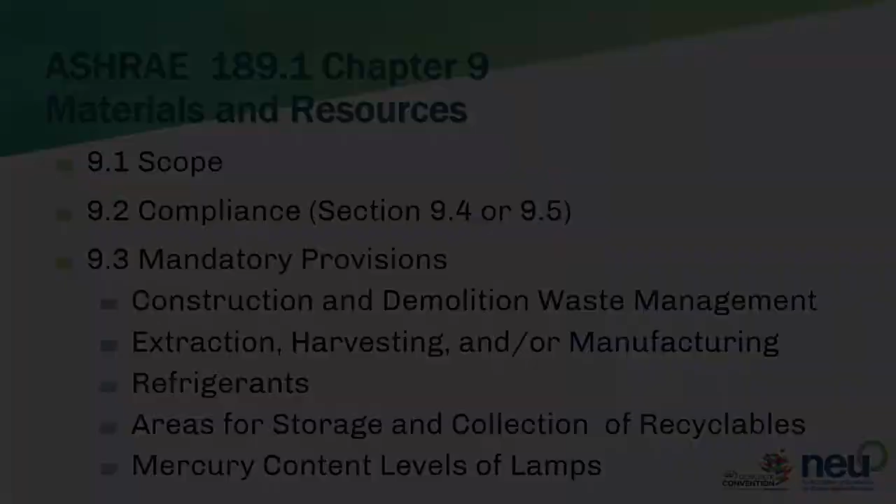So it needs to be an industry-wide product declaration. A Type 3 declaration means it's verifiable and developed with an approved product category rules. So we have these environmental product declarations as well as other criteria such as, is the material regional, is it bio-based, recycled, but that's the level of extent that is covered when it comes to the material and the attributes of materials in sustainability.

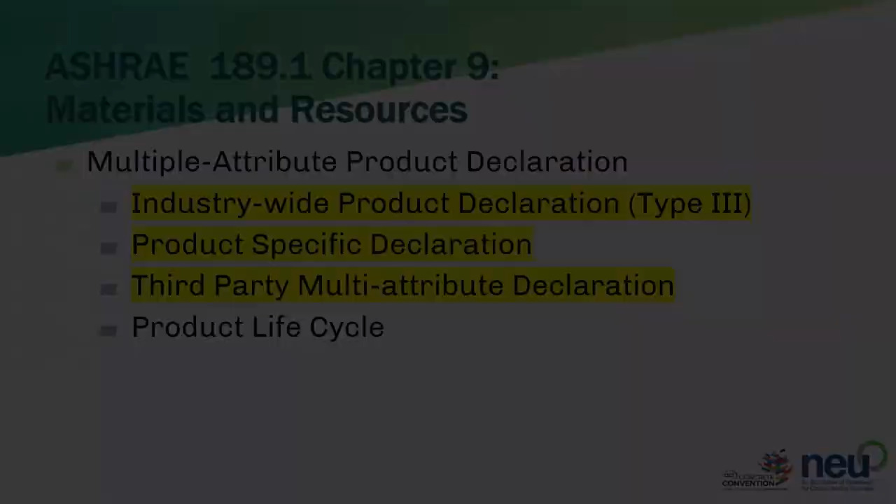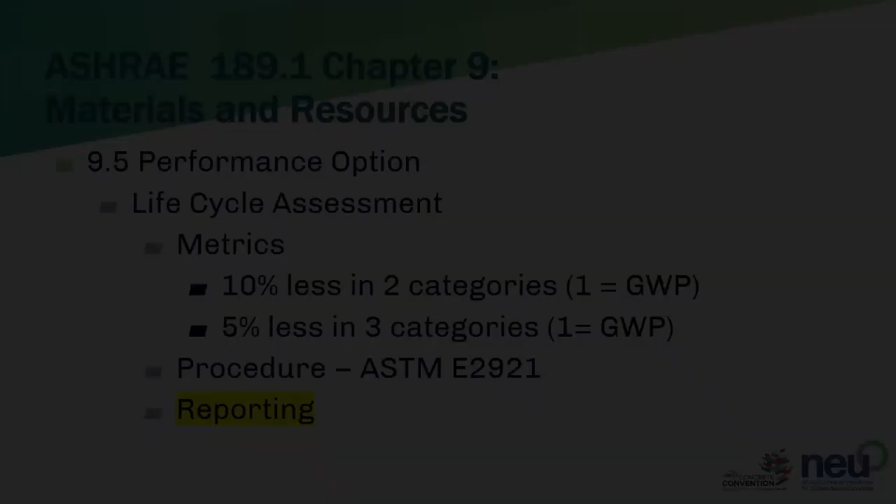So we have these options. It does require third-party multi-attribute declarations. So this information just needs to be generated and put out there. And the most important thing, as I previously mentioned, is they're really looking at getting the reporting out there so that everybody understands what we're doing and we can get a track record of how things work.

But then there's other criteria that might be required depending on the particular application. There's ASHRAE 189.3, that's for hospitals, and they're looking at some other possible considerations for what must be reported because of the potential for ionizing radiation, human toxicity, particulate matter. Those come into play if I'm dealing with a healthcare facility. So it depends on your facility and what can happen.

Of these things, if it's a healthcare facility, one of the things that might come up for human toxicity related to concrete wouldn't be the concrete itself, but it could be any sealers or coatings or materials that you're putting onto the finished concrete.

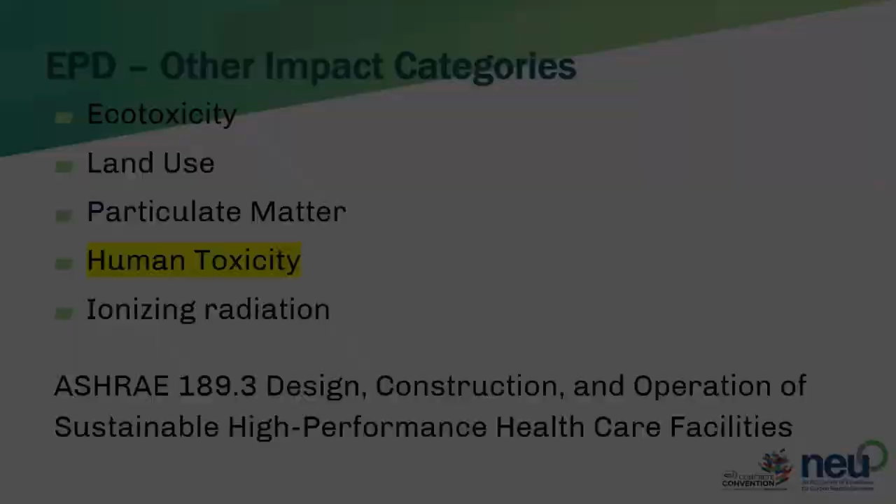So the New Building Institute, a very aggressive organization trying to help get us to carbon neutrality, they brought in a code change proposal to the International Building Code. This was brought in the last cycle. The code change, you can, if you go to the ICC website, you can find it. It's S178-22, but it set specific limits on the CO2 content of mix designs based on compressive strength.

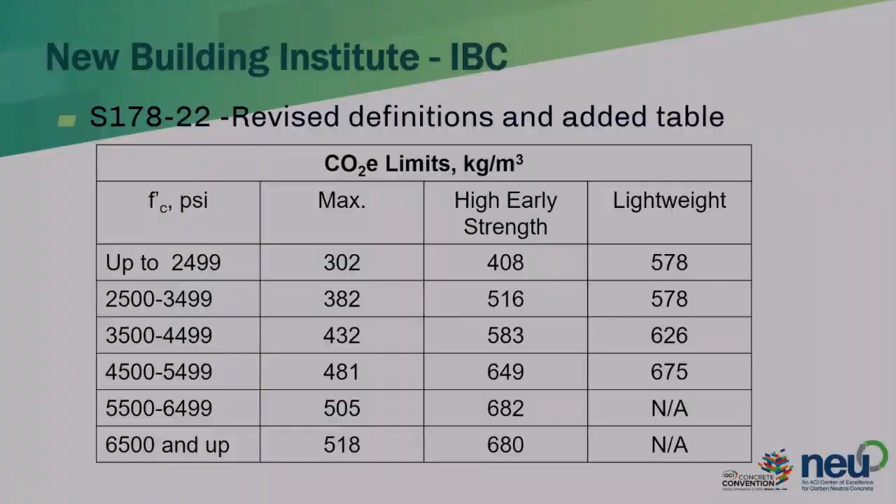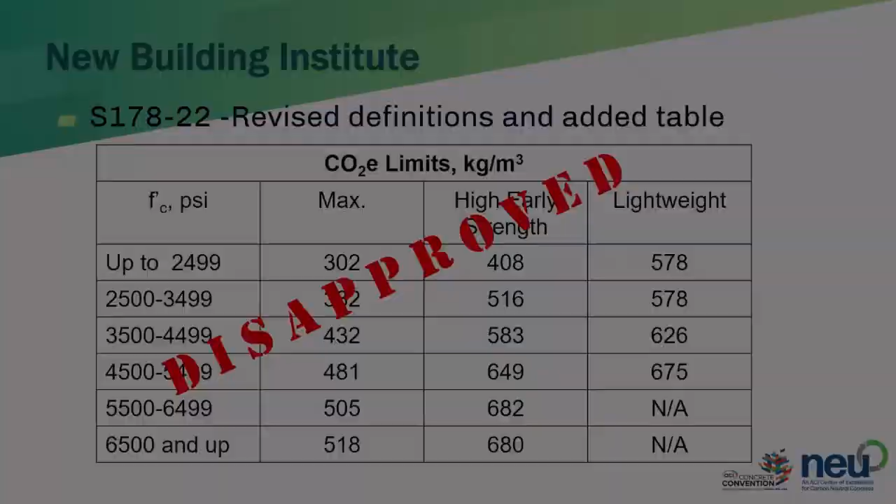So this was a proposal. It got disapproved. It was part of a huge proposal covering glass, steel, wood, and industry opposed it because it was viewed as oversimplifying the concepts. The building code officials voted to disapprove it because they didn't want it in the general building code. They felt it belonged more in the International Green Construction Code. So there was this general conflict: we want to make something happen everywhere, but the IGCC is only adopted in a few places, so it became cumbersome, to say the least. There is also the ICC 700, the National Green Building Standard.

This is for 1 and 2 family dwellings. There is Chapter 6 on resource efficiencies, so they do address that. They talk about things you can do, but they're voluntary requirements when it comes to using concrete with 1 or more SCM. But again, it's moving in the right direction. It's a slow process because of all the complexities tied to this.

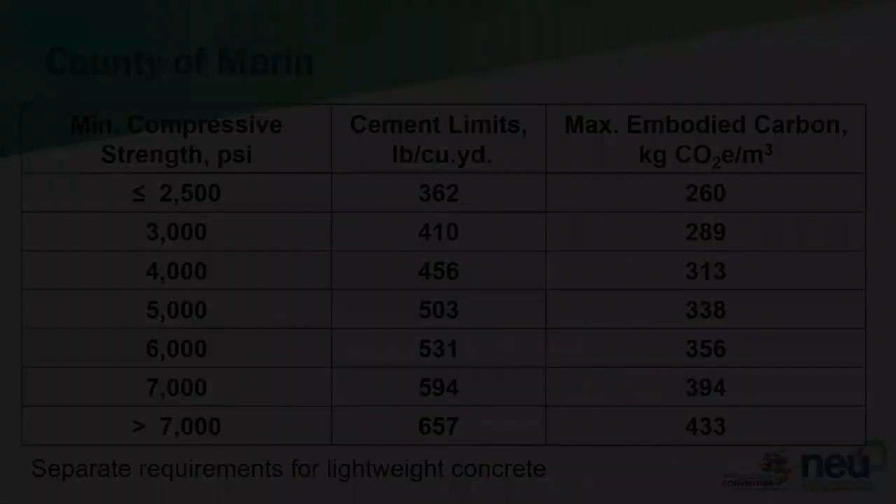Just like Mary was saying before, the concrete by itself doesn't look all that bad on her graph as far as the global warming potential. It's just that there's so much of it. So why not go after the large volumes of concrete versus larger building types?

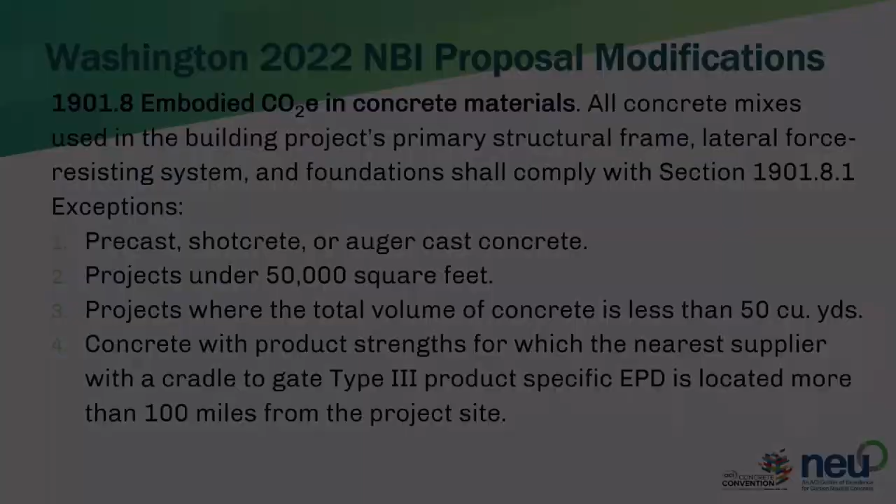As we continue to look at this, this is pretty common as to what happens when they try to bring these specific requirements in. It tends to get backed off because of the comfort level of those writing the rules and regulations, so that it ends up being report EPDs. There's not enough EPDs out there for all the concrete. These are just some examples of what is out there to show you the types and style.

Sometimes it's a regulation, sometimes it's a code requirement, sometimes it's legislation. There's varying degrees of what is happening out there. The Carbon Leadership Forum says there's 230 plus entities worldwide that already have some sort of rule or regulation about carbon neutrality.

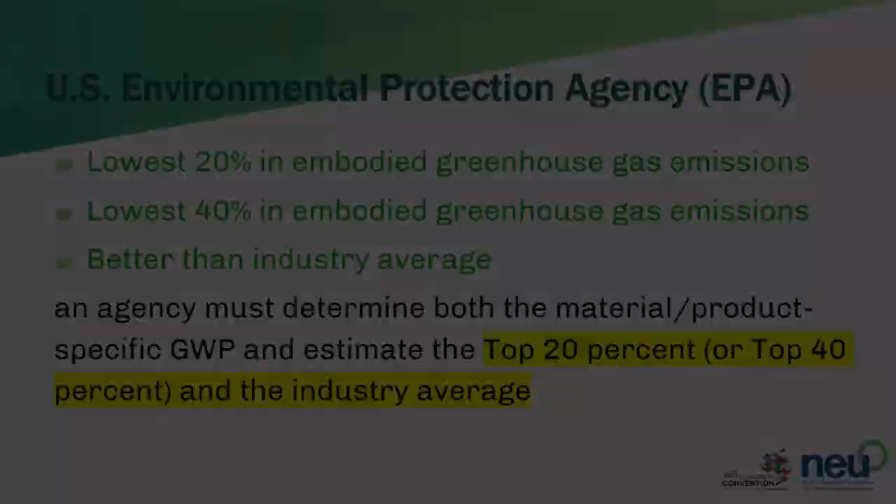What's industry average? Is it industry average of those who have produced EPDs, or is it really intended to be an industry average? The NRMCA database that's out there now has more than 7,000 ready-mix plants. There's over 2,000 ready-mix producing companies. So the NRMCA database has 60 companies reporting data. That's less than 3% of the industry that's reporting. There's 303 plants reporting, and that's only 4.5%. So what is that industry average? We're nowhere close to having anything that can be statistically demonstrated as being an industry average.

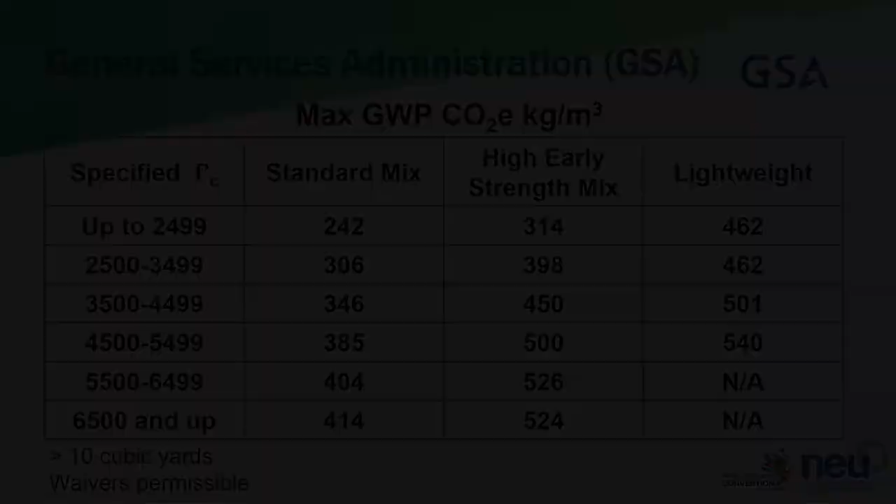The General Services Administration, for all of their projects, basically requires the same thing that was adopted in Marin County. This is the table that's being promoted around the nation by the New Buildings Institute.

So again, the EPA set the framework and then directed both the FHWA and the GSA to come up with a method of compliance. And this is all from the federal legislation, the Inflation Reduction Act.

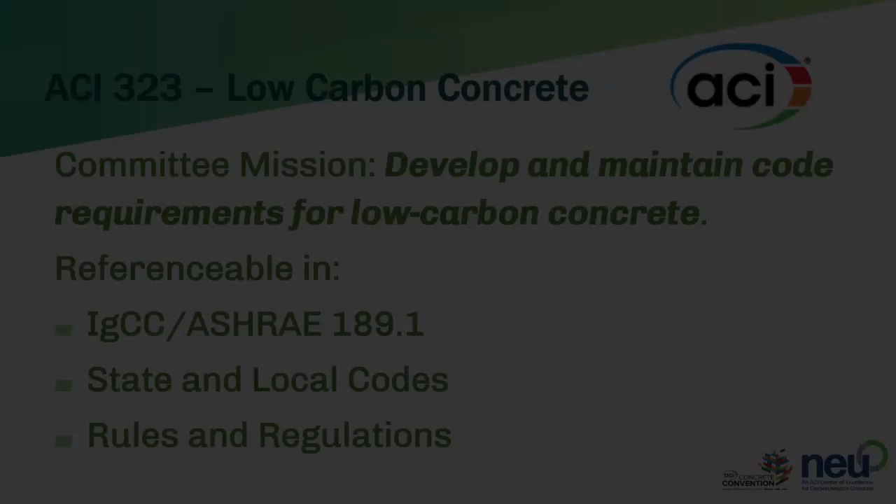So ACI now has a newly formed committee, Low Carbon Concrete. They met for the first time at the last ACI convention. They are trying to put something together that can be referenceable in other codes to try to move things forward. And again, it's complex.

There's so much that should be dealt with or needs to be considered when we're dealing with this. Should it just be compressive strength? We get questions about that. There's cap limits already in 318 and 301, the design standard and minimum code requirements and specifications for structural concrete. If you have saltwater exposure with freeze-thaw conditions, your SCMs can't go over 50%. It's just prohibited by the code right now.

So other things need to happen if we're going to take the approach of, well, what can we do to encourage carbonation to occur in the concrete once it's placed, for the in situ reabsorption of CO2? As the carbonation occurs, the protection for the reinforcing steel is going to diminish. So are you compromising durability of the rebar by having carbonation occurring in your concrete? There is no one simple solution, and it does get really complex, and we're trying to handle it with very simplified code provisions.

So the American Society of Civil Engineers, through the Structural Engineering Institute, has a sustainability committee. They're also working on guidance documents for structural engineers to make informed decisions. ASCE also has a standard practice for sustainable infrastructure. It's pretty benign, but ASCE 73 was just released this year.